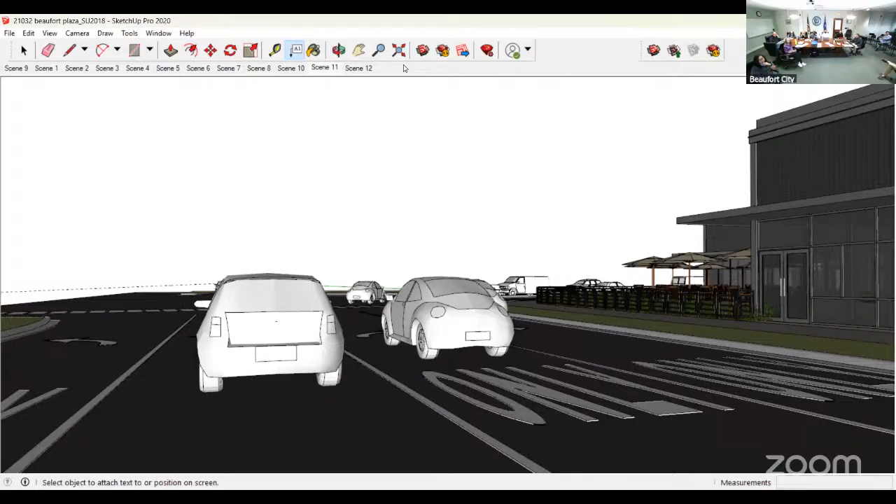This is coming from Lowe's up 170 northbound. But again, engaging the street while pulling people in with the use of the buildings. And then kind of the view that hardly anybody will see, because you don't stop in the middle of the intersection, but it's something nice to be able to pass by and see.

We presented or discussed a version before which had the buildings slightly tighter in the back, so it didn't have a long view when you were turning the corner. The suggestion in talks with city staff was that we try to open that up a little and get shorter faces of the building to the sidewalk, then create that larger face as it tapered back to create longer views as you go around the corner. These are just things to consider as an alternative, I wouldn't say an alternative to a two-story mass order or the two-story requirement.

So I like that concept a lot. With respect to that particular corner, I'm just wondering - I don't like that corner. They took a crooked corner and replaced it with another crooked corner, and there are a lot of accidents there. I'm just wondering, it does look like that pedestrian plaza comes really close to the road in this rendering. It's right up to the backside of, if I'm not mistaken, the existing sidewalk there, so it comes right to the backside of it. What it doesn't do, which a building would do, is block that view.

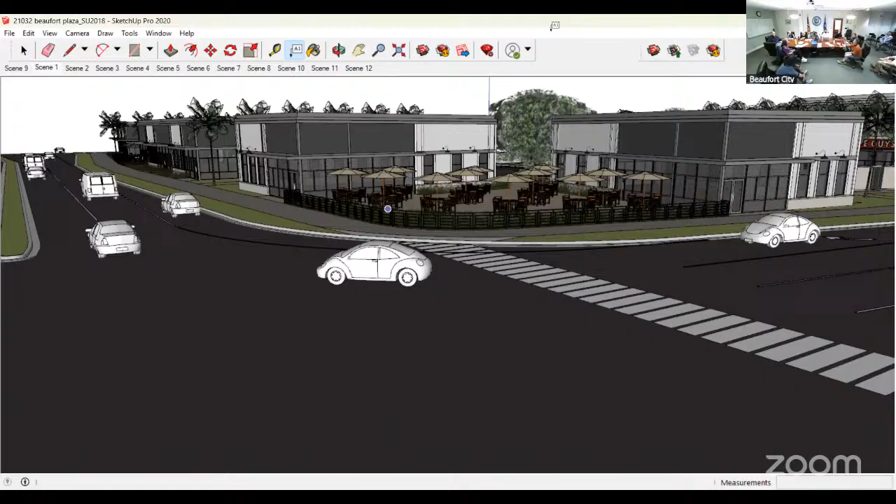Any other public comment before we leave? I'm going to go ahead and close the public comments section then, and let us go to our discussion of chapter 4.

My voice sounds like it's changing. I'm over being sick there for 5 weeks, but my voice seems to be struggling.

Kurt, is there any way you would like to approach the rest of chapter 4 in particular? Well, as of the last meeting, there was a suggestion to just do the notation guide of everything.

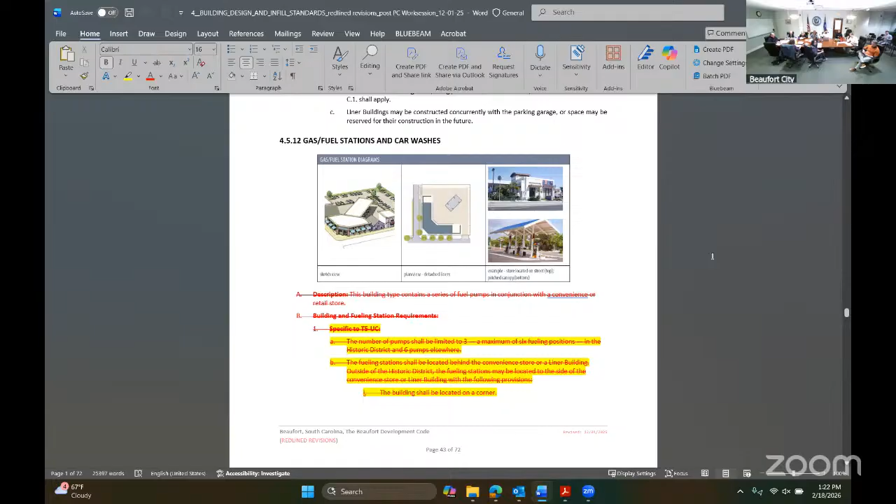Okay, everybody same page. Right now, we had some very general discussions. We started off, so I think one of the comments was the schematic on the left.

It's kind of like an urban Buc-ee's or something that I don't think anybody's ever seen. So that's probably not likely. Not yet. Yeah, maybe we'll call it Buc-ee's. They can do a little Buc-ee's and an urban Buc-ee's. Anyways,

So I think everybody recommended kind of, if you remember, that's kind of where we stopped last time. We can revise those schematics, but essentially we were, for all intents and purposes, rewriting this section. Let's just start. So we're taking out the existing section and revising it quite a bit, so if you keep going.

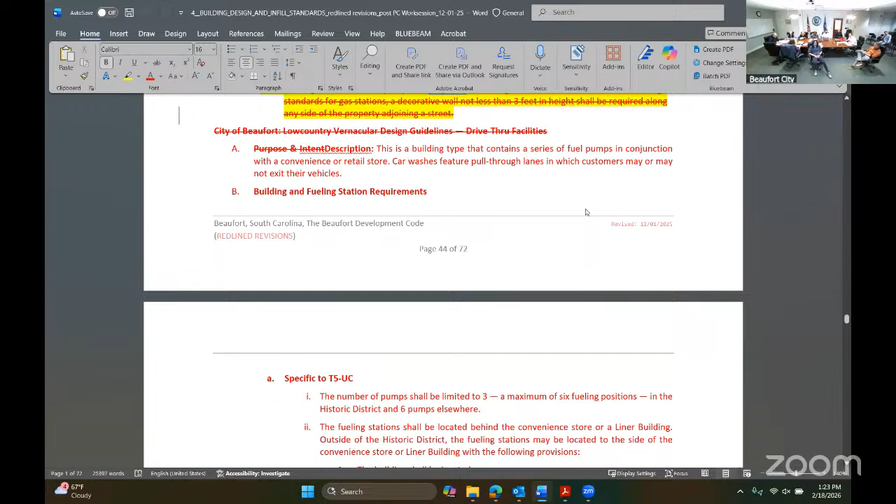It starts with specific T5UC requirements, which are just being cleaned up a little bit, but not too much, then adding the general architectural design after that. Then the low country design - one thing we see a lot with gas stations is the colors. They're somewhat difficult to deal with because our code requires fenestration on the gas station building, corner lots are difficult at times, and they like to use bright colors and blank walls. We want to make sure the Lowcountry design standard is also there, so as you go down to site planning and orientation, we were trying to address all these things.

Before you get to that, could I ask you a question? Going back to building fuel station requirements specific to T5UC - the number of pumps shall be limited to 3, with a maximum of 6 fuel positions in the historic district, and 6 pumps elsewhere. Is that distinguished from the current code? It's been revised, but this is similar to the current code. Are we looking at a proposal or the current code when we see the red? This is a proposal, but some of it is similar, just reorganized - the yellow is all new.

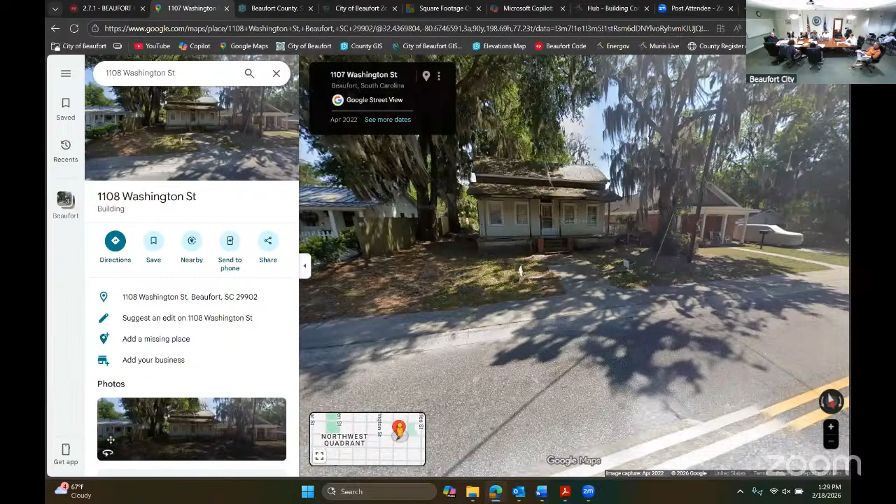So it looks like there's a gas station at the intersection of Harrison and Boundary. Is that in the historic district? Harrington... yeah, that's the liquor store too. So I think it's got a couple of gas pumps.

We would take out the historic district reference. Are you okay with going to 6? Because this was grandfathered in, right? The limit was 3 in the historic district, and then 6 pumps outside of it. That would be basically 2 rows, so that's 4 pumps essentially. Well, that's grandfathered, so. All right, so we'll eliminate the 3 and make the historic district.

Sorry, I've gone through this a few times, but we're kind of in a more detailed discussion, so it's hard to. I'm sorry, go ahead and go forward then with the rest of your.

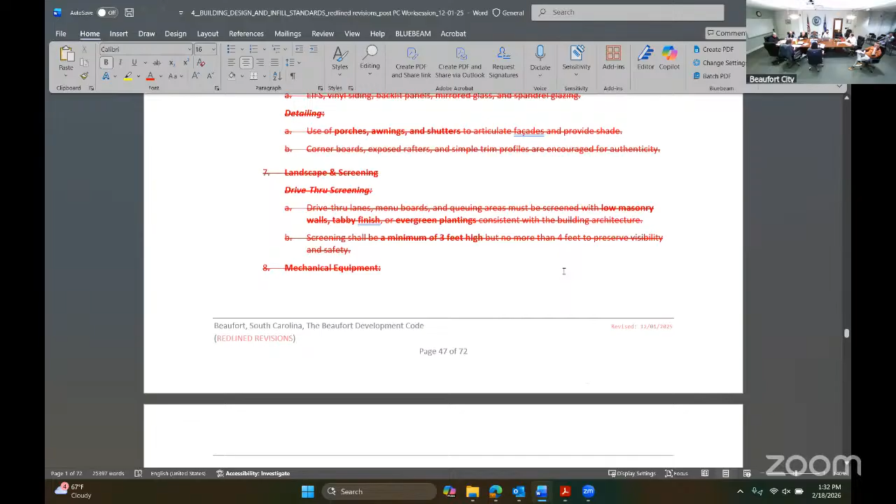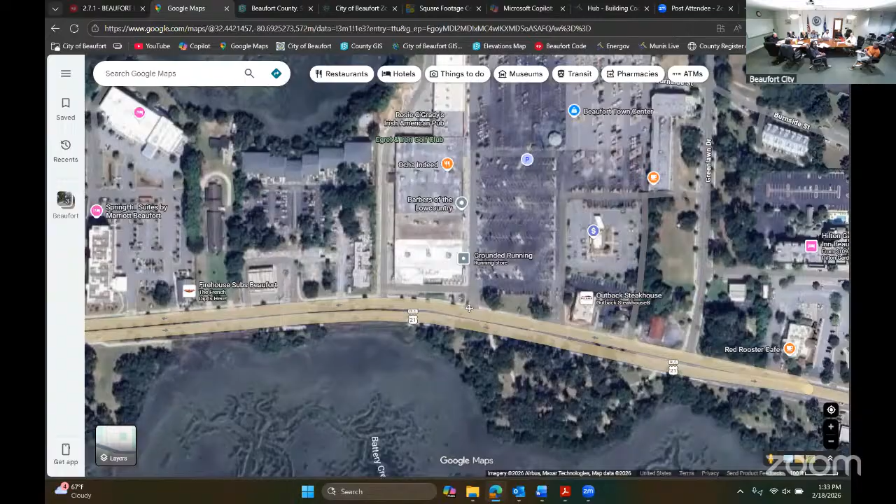that would comply, right? You mean the one out on 21? The one on Boundary Street? It's on a corner, and the corner is given - the building shall be located on the corner - that complies. Essentially what this means is that the pumps can't be forward of the building, that's the best way to put it. Which is usually what gas station companies want to do, because they want you to easily pull into their pumps from the street, and you want to see the pumps, see that they're open, see how easy it is to get in. So if that Enmark was not on a corner, that would not comply - they would have to put the pumps behind the building. That's right, and we mirrored that design with the Parkers as much as we could at the Beaufort Station.

Because that had already been approved, I think, by the MPC, but when it came back to you, they used the corner similar to these stations, so you can see the pumps. Those do look like 3, don't they, as opposed to 4? That's a lot, it's a pretty big pump area. Yeah, so they got 6. So this isn't in the historic district - this was built when this code was in place, or maybe the precursor to the Boundary Street development ordinance. This is pretty new, built in the last several years, like 3 or 4 years. So I would say this substantially shows what this code is trying to do - this is exactly what it's trying to do.

That makes sense to everybody.

You said this was built in the last 3 or 4 years, you mean the building itself? Well, the gas station used to be closer to City Hall. I forget if there was something there or not, but they did an extensive remodel in order to get this station as it is now.

I've been coming in here ever since 2016, and that gas station, I think it's always been there like that. I do think the car wash building is new, because I remember when it was built, that's been in the last 4 years or so, because you had to create a driveway to get into it.

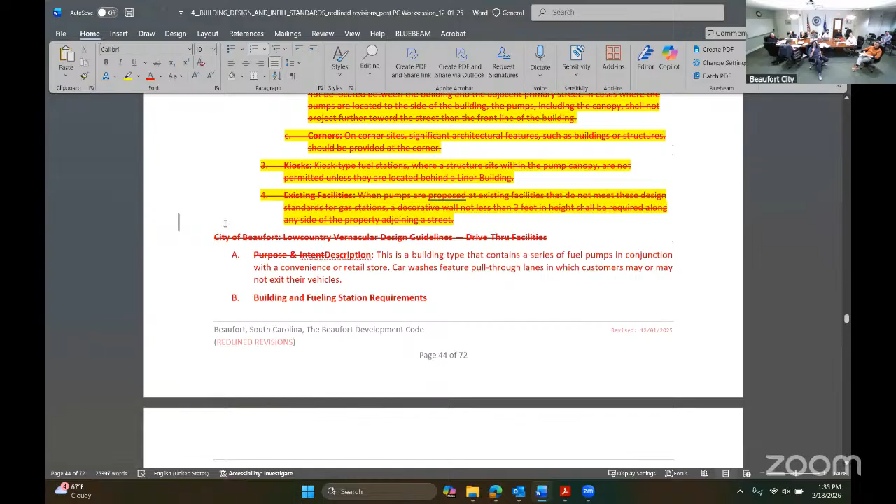Let's go back to that picture that you had, and the street view. So you can see, this probably could have been a little more successful for pedestrian orientation, but they've got the windows on both sides of the street, since it's on the corner.

So we're trying to do this for all of the gas stations basically, so they have fenestration. Do you think this meets the frontage requirement on Boundary side? Well, the gas stations are specific, that's why they have to be at the corner, and why they're kind of exempted out, because it would be impossible otherwise to make them work. That's why they're their own section with specific standards, so I think they did a pretty good job.

I don't know if Olivia, if you were here when I think this, it's definitely here, and I think it was done under the Boundary Street code, because I remember this issue about the fenestration and the windows, since it's on a corner, trying to get the windows in the corner, and Subway, and there might have been a hood. I think this was done under the previous form-based code, the precursor. So what we're adding is wanting a more pedestrian oriented entry onto Main Street, which they've kind of done, but I don't know if they've done that well.

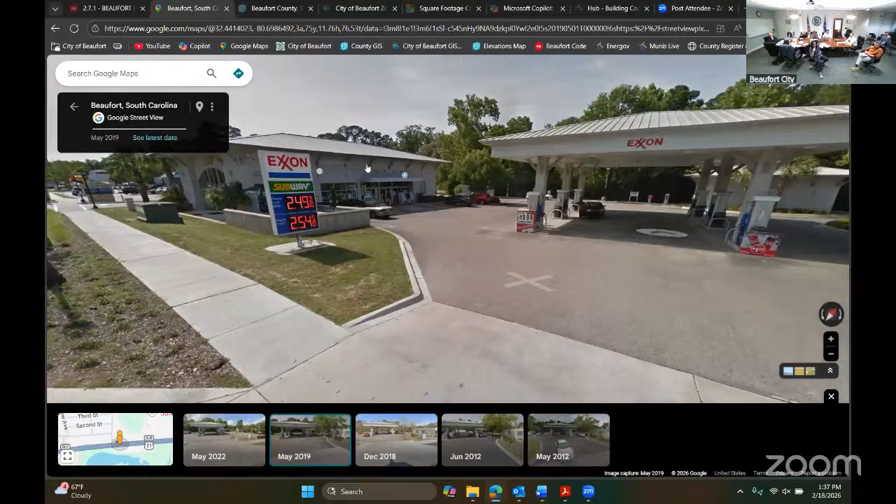Wasn't the original design for that front part to be sort of like a little restaurant? Yeah, I think it was. But I think that they kind of opened it during the pandemic, and then things might have changed because nobody was going anywhere.

So this is what the code's trying to do, is trying to create similar drive-throughs to this. Now, if you go down on page 45, so we talked about that in the yellow one. Okay, so we talked about that, just keep going with that.

And then great relationship, and then we've added B, which was pretty controversial when I first started here, and you just heard the presentation from Adam there: automobiles shall not pass between the building and the street. So this is again for drive-throughs, gas stations, etc. Trying to make that crystal clear that you can't put a drive-through lane or any kind of ordering lane, like the Chipotle or whatever it may be, between the building and the street. However, if there was a liner building, you could.

And then we've added outdoor seating, small plaza areas, kind of similar to the discussion that he had. I think it's a good example, we're trying to, and you saw from the picture that they have a little patio. I don't think I've ever seen anybody using it at the end market, but we want to encourage that.

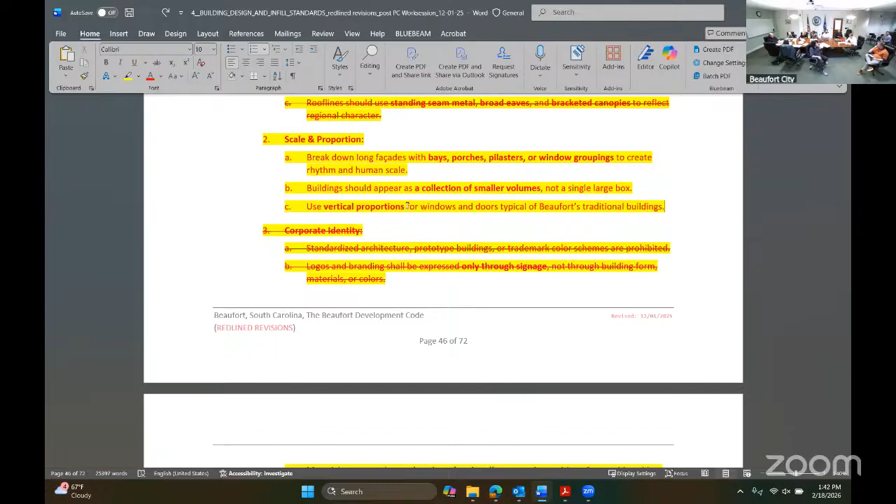There is a reference to chapter 3 about that, but this actually would be suitable, so maybe you should put car wash, slash oil changes. Yeah, because the bay is, the only thing really different is instead of being like a single bay, there's multiple bays and they're shorter, but the same concept of come in the front and out the back, or vice versa. Okay, I think that.

And they're proliferating almost as much as car washes. Yeah, the one over by this whole area that went up, what's it even called, like a 5-minute Take 5. We tried to have their bays basically not face the street, so they had to build a little liner building. Their building, it used to be, but everybody knows what we're talking about. So they built a liner building, which is just for rent. It's been for rent. They built it, but it kind of screened the bays. So I don't know if you have to have a liner building, or you just have to have the building sideways. Yeah, see it there. That was the best, I think.

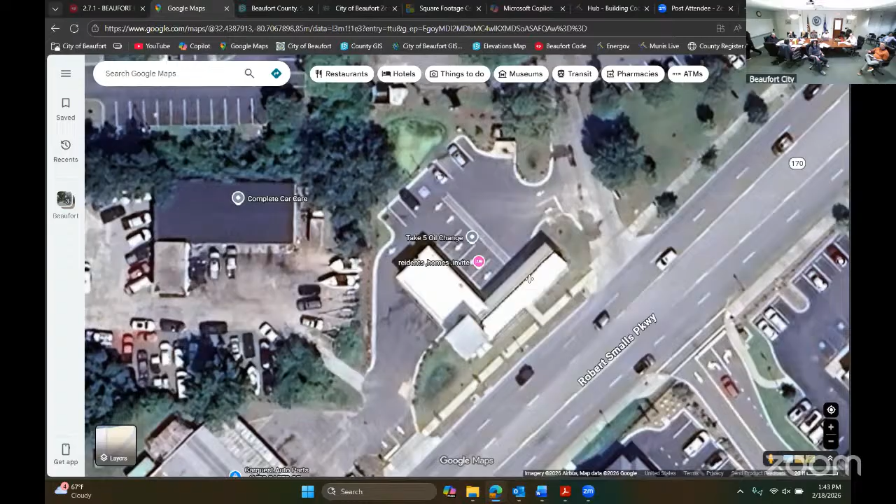It would be nice to require some kind of screening, because I'm thinking of that one by Lowe's, on the same side of the street as Lowe's. I mean, their building is sideways. And then you know, they got all those bays there, that are always open. The tire company, Discount Tire. This one, right, and I mean, it's a nice looking building, it is, but you need some kind of landscaping or something to screen that part where the cars are waiting around in the open bays and are visible.

I don't think you need a liner building. Right, let's see, well, there they got it there. Yeah, that's what I mean, you don't really see this stuff there. So but I think we can add that without too much of a change, so if you want to add, we can call it quick lube or vehicle service oriented facilities. Sure, we could do that. That's a good term. Makes sense.

And that didn't really have the fenestration that we'd be looking for, but I don't know when that was built. Looks there, that's good, still not bad. The worst side, it is kind of screened from the street. I already got the green wall.

Maybe that was the compromise for the windows too, for these. How do you get in and out, do you go in and back out? There's a turnaround, a circular drive there. You can pull in and loop around and come back out. So you don't go in one side and out the other side?

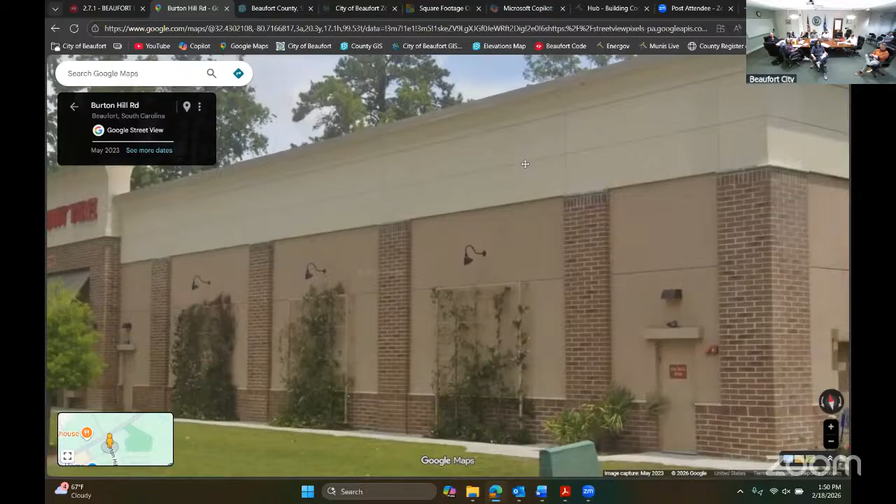Go back to fenestrationless walls? That one did have a little window, didn't it? Is that the one you're speaking of? Well, that one has probably 80 to 100 feet of blank wall, but they decorated it. Right, I think that was the compromise, and up at the corner they do have, I guess where the awning is, they do.

I don't know, I just wonder if we shouldn't quantify what we're asking for. I mean, because if we're saying 40% fenestration, they could do 60% blank wall.

I see what you're saying. Is that, I mean, if you go to scale and proportion, we're already- it says break down long facades, bays, porches, pilasters, or window groupings to create rhythm and scale. Right there, number A, I think this one's just to kind of reinforce that.

I think because this is going to go through design review with the board, it could be a discussion about 'blank.' We're looking at this, it's not exactly blank. It does have a window and it does have the greenery, and it seems like everybody thinks that worked out.

In that building in particular, or any vehicle service type of building, to use Mike's term, those are the backs of the bays. So you want windows looking into the backs of the bays?

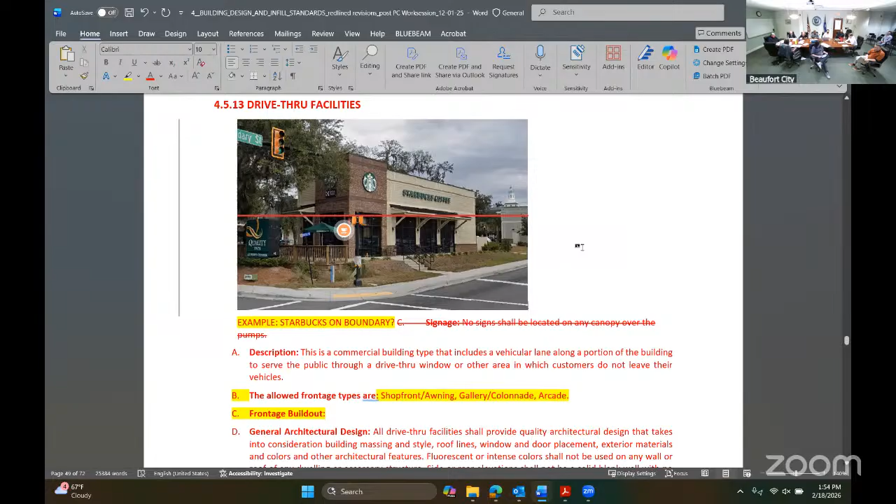The building itself works, but we will find another example for that. Maybe it doesn't need a picture - people know what a drive-through is, and this picture doesn't even show the drive-through anyway, and we don't want to show that. So we're saying either no picture or a different picture. We're gonna try to find it - that's already been brought up.

How about the one down the road, the giant drive-through? Do they have coffee? I've never ordered coffee there. Have you ever seen anybody? Once, sorry.

All right, so we'll remove the picture, but this is just drive-throughs only, right? Last one was gas stations, car washes. So, just on drive-throughs - question, is there a pending lawsuit right now about the Dunkin' Donuts on Lady's Island?

Is there litigation pending on that? If there is, it's with the county because that was a county property, not the city. Okay.

I don't know what the problem with that Dunkin' Donuts was. I think they wanted to do a drive-through and I don't know the reasons why the county said they couldn't do it, but they have formed back out into a very, very busy road. It's like Chick-fil-A, it's actually not bad, but getting better.

That Dunkin' has all that. It's really hit or miss as you go down Sea Island - some properties are in the city, some are in the county. It's hard to tell, no rhyme or reason. Sorry, yeah, that one's in the county.

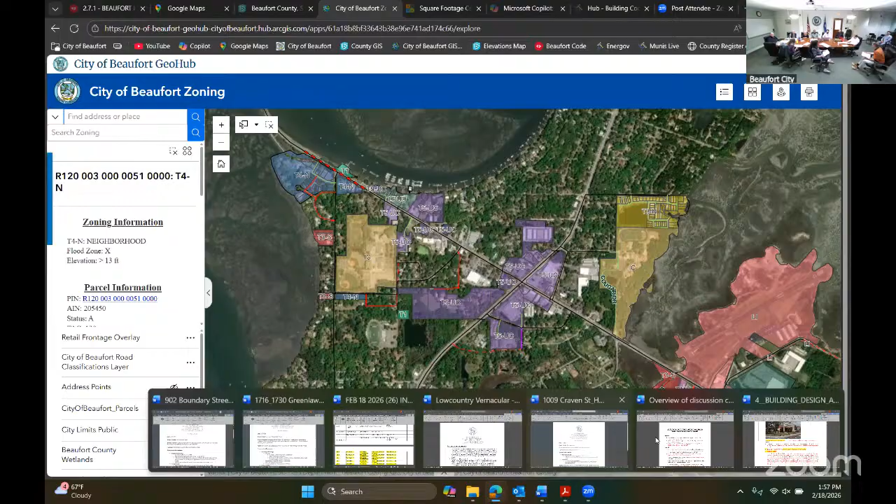So, speaking of drive-throughs, can we go to the satellite view, the boundary near Robert Smalls? I want to point out a couple things. Like that Dunkin' Donuts there is a bad example of drive-through, and that Chick-fil-A is kind of opposite of what I think we're trying to do with engaging these corners. So I made a note to propose prohibiting drive-throughs within 250 feet of major intersections, based on the street hierarchy diagrams.

I think that's a good idea. Do we require drive-throughs to be on a corner? No, I think that's what he's bringing up as a traffic engineer question. It makes it pretty hard to do a drive-through. They work better on a corner, I'll just jump in — think about circulation, otherwise, yeah. So she suggested we restrict drive-throughs to 250 feet from a major intersection.

I don't think that's all worth it. I think the problem — we have proposed it — the curb cut proposal here is not just about corners, that's the problem, it's major intersections, because traffic backs out. That's right, it has to do with access and the businesses. Starbucks and Chick-fil-A, you're going to have that backup. There are certain other businesses where it's simply not a problem. And I know ownership can always change, but it honestly has more to do with access on the major roadway — that's a stacking volume problem.

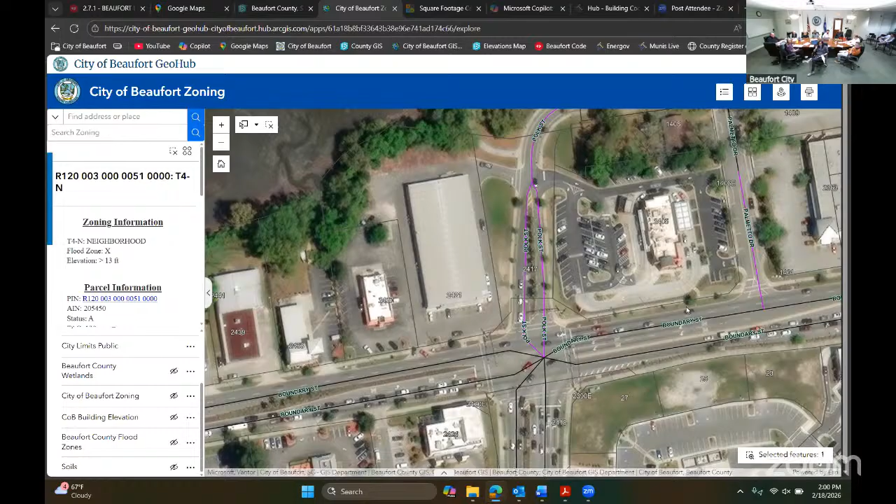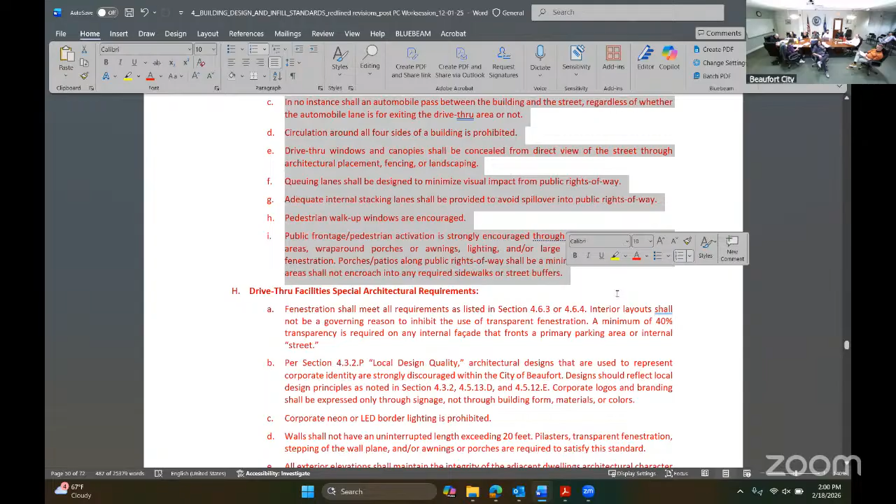Right, well I think that's... okay, let's go back to this because it's kind of in there, we can flesh this out a little more. This whole thing should have been yellow, honestly — all the red is negative, this is pretty much completely different. So obviously we're adding general architectural design and low country standards that we've added to every section. So again, for every use, you're trying to make it more of the Beaufort vernacular, the low country vernacular, but then you just go up a little bit.

Sorry, that's okay — let's just go through each one because there's a statement we can expand upon. So again, they have to front the primary street frontage, with pedestrian entry going toward the primary street frontage with direct access. That makes some sense, I think everybody's agreeing on that, right? So let's keep going down. Drive-through lanes shall be located to the side or rear of the building — everybody agree on that? It's like the last one, drive-through lanes in front of the building.

Chick-fil-A has lanes in front of the building. They were built before the form-based code, and then they added that other drive-through lane at a time when it was different. Paul said at our recent meeting there's quite a long story to it if you want to hear it. The original building was put there before the form-based code.

Under the code as it is right now, the Chick-fil-A model could not be used on that site plan. You could do a Chick-fil-A, but it would have to be organized differently. And to their credit, they have quite a bit of stacking now. Before, I'm not saying they should have done it, but you'll remember it really backed up on Boundary, it was bad news.

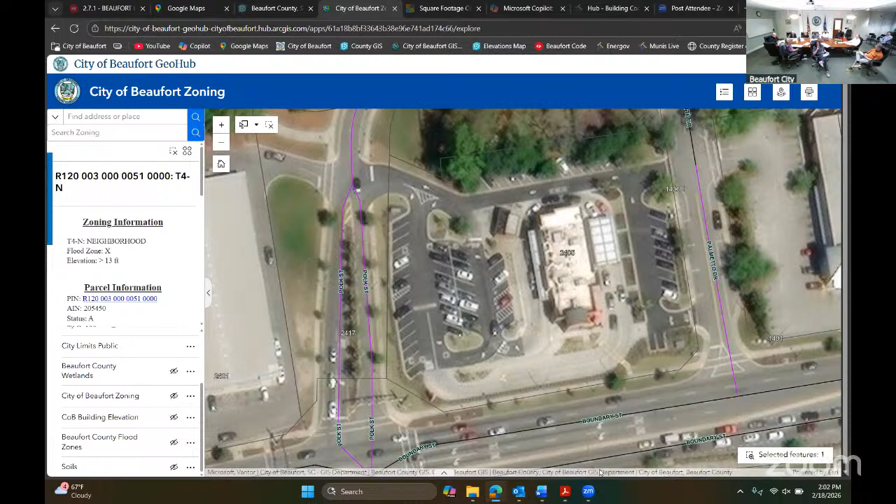We also worked with Dunkin' Donuts recently, we helped with their redesign, so it's about as good as it can be for an existing building. It's gotten a lot better, if you haven't noticed. It's pretty much taking the traffic off the streets.

Getting back to Benji's idea about limiting at intersections, could we limit the number of drive-through restaurants that could be at a given intersection? So you don't have four drive-throughs all at the same intersection? You could do that, but I don't know what the problem is if they all end up looking and functioning okay. I think the McDonald's, for example, looks fine.

Chick-fil-A now functions well too. Again, it's not appropriate for that site under our current design, but if they end up functioning okay, I don't know what the issue is. That's what we're trying to do here with the form-based code, trying to make them work.

After G on here, I think G reads okay, but then I added another letter in here, saying a traffic study shall be made to substantiate the proposed stacking design.

Sure, let's go through this if you don't mind. We got B, I think, for everybody, which is rear on the side, we're just making this very clear, because there was a lot of controversy before I got here. I think there were text amendments, lawsuits, appeals, and newspaper articles. C is just trying to make it really clear, and D is making it even clearer, so that you can't do like the border lane, which was a controversy.

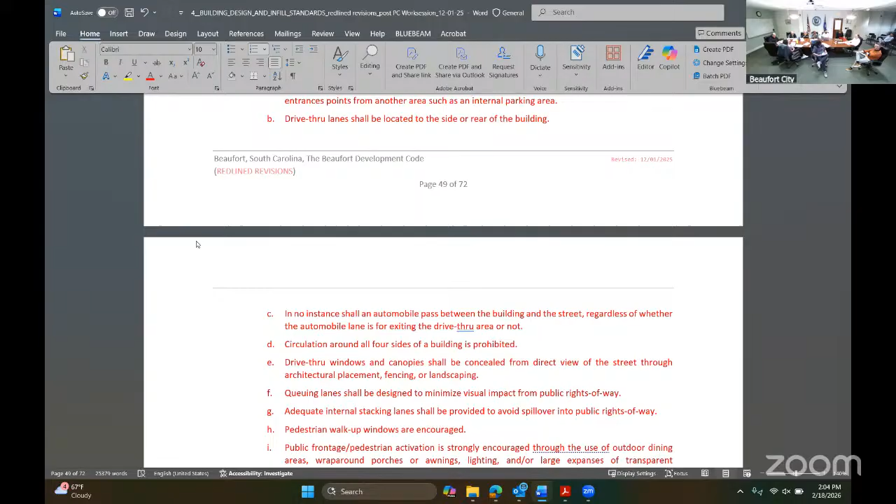The drive-through windows and canopies, per E, can't be seen from a direct view of the street, but they can use fencing, landscaping, et cetera, to screen that. That makes sense. Then queuing lanes shall be designed to minimize visual impact on the public right of way. So that's what we were just talking about.

G covers adequate internal stacking lanes. I think that's where we can add what Bill stated, that you have to provide a stacking analysis. I think G is fine as it is, but I would add another letter after G, saying a traffic study shall be made to substantiate the proposed stacking design.

Trying to limit the number of drive-throughs in a particular area, I think this will tend to limit whatever you need to do. I would just call it a stacking study, differentiated from a traffic study.

Oh, I'm sorry, I said traffic study, that's what I meant, it can maybe just be put into G as another clause there. You don't have to renumber, you can add it into that section however you want. Can you explain to me the difference between G and a stacking study? When I talked about it recently, what I was talking about is, for example, a queue analysis.

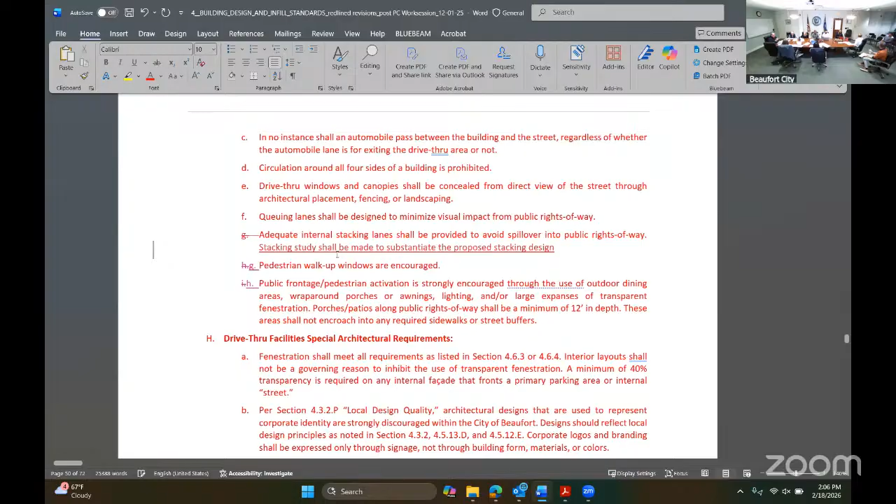Every one of these queue analysis stacking studies are different based on the different restaurants. So they have to come up with evidence from other examples at other locations that substantiate, based on the design of this restaurant with their name on it, that they can show at peak hour that they have adequate stacking. They have to demonstrate to us, and they know how to do it because there's a standard way of doing those.

So does adequate stacking mean that all their lines are contained within their site? Yes, exactly - so there's no spillover impacting general traffic. Right, okay. And they're gonna show those to us, and they have to satisfy us. We will have the right to look at it and say those numbers just don't look right based on my experience with X restaurant.

And just a reminder, the TIA, traffic impact analysis, is required for any use that generates over 50 peak hour trips. So I would say any drive-through, something like that.

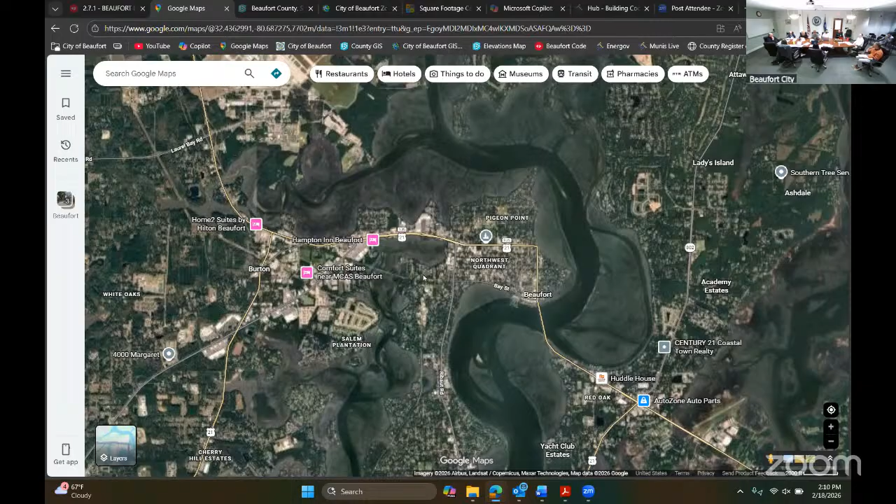You mean like Boba's Chicken over by the Food Lion? Is that what you're talking about? Yes, it has a little drive-through thing, they have a little order window on the side. I don't know if everybody uses it. Boba's Chicken, yeah, that's it.

Well, that's a good point, they're not gonna generate 50 peak hour trips. But that is supposedly a one-way street there, which nobody follows as far as I can tell. When you see people, is it one way going out away from the picture? Yeah, you can only go that way. I've never seen anybody follow that - no, I use it all the time.

Really? I went the wrong way. You go the wrong way every single time. I come in that way.

So is that something we want to encourage? I mean, low volume, but that's where I think you can have some discretion and wouldn't necessarily require a TIA.

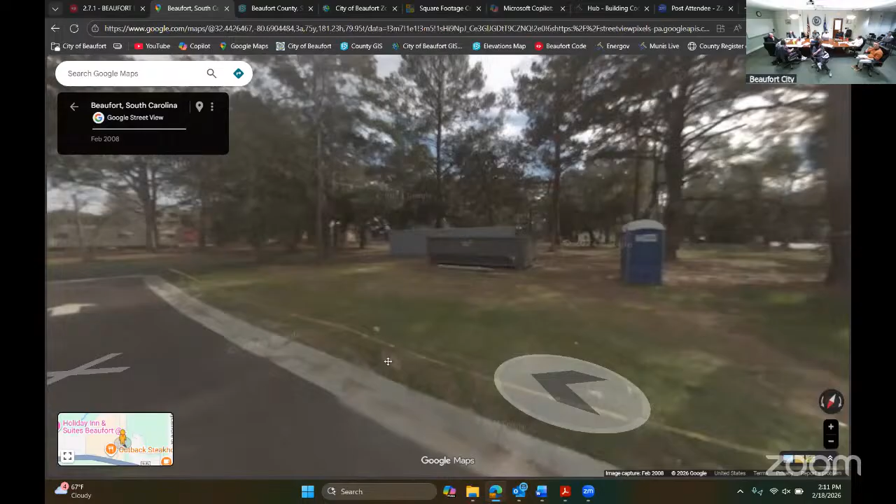It could be an exception made by the administrator. You could say a TIA shall be required except at the discretion of the planning commission under certain circumstances, as identified by the planning commission. I think require it unless accepted by the planning commission, and that way a low volume little place like that, we might want to consider doing that.

Because a TIA is gonna cost them thousands of dollars, and does it make sense for something like this versus them just proving what's their typical queue? This is off the main drag, it's a small place.

By the time it gets to the planning commission, and then the planning commission says do a TIA, that's all the money and all the time. It just seems like if one's gonna be required, it should be staff when they come to the pre-app, so they can require it unless there's an exception made.

No, just want to stay with the 50 trip. Right now we have a 50, and you all apparently think that's too low a bar? No, too high a bar.

It could be, unless, maybe you just have the administrator's discretion. You have the 50, then you can add, if you wanna lower it. He probably would have just waived it, so you don't want to give the administrator that. So you'd say you have that at 50 unless, because of special circumstances, the administrator decides that one should be required anyway.

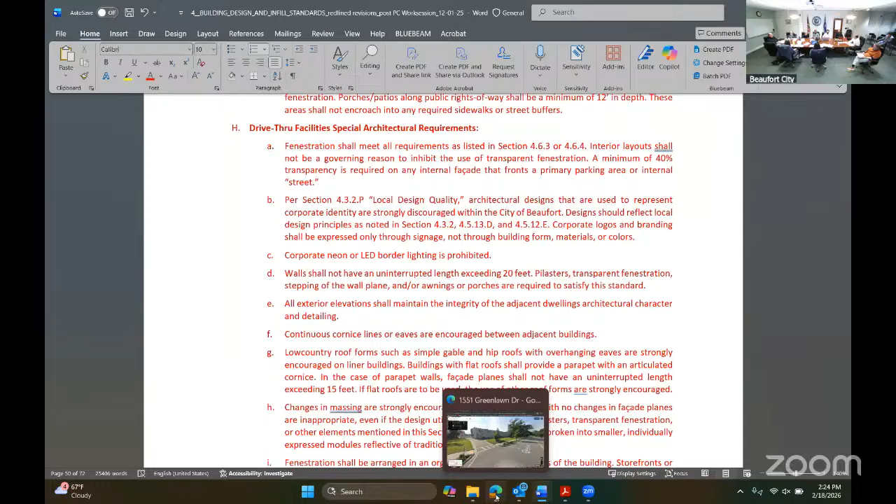I wonder if we could find some examples of where a corporation has adapted to a local style, because one company that comes to mind is Parker's. They do a really good job. They put up a lot of buildings, you still know it's a Parker's, there's a Parker's sign, but their building architecture adapts.

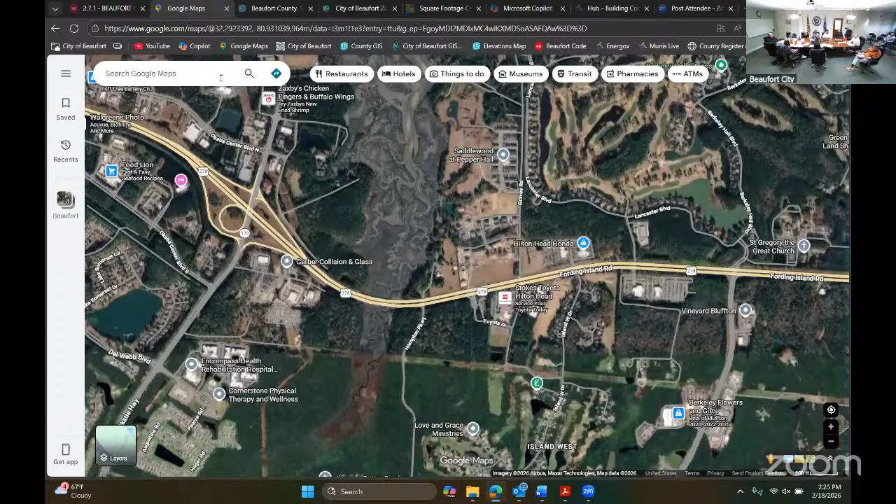If you're heading westbound on 278, just before you get to the ramp to head to 170, coming back towards Beaufort, there's a Parker's they just built that looks very, very Low Country. The one at the new shopping center, yeah. I think it helped that their headquarters understood that at some point.

And again, almost everything's gonna come through the design review board, so that's where the discussion can get really detailed, so to me saying 'strongly discourage' is pretty strong language right there, and if it's still not working, then at the design review board they can say, I'm sorry, but this really isn't consistent. I'd rather see it reworded so they know they're having to deal with the Low Country.

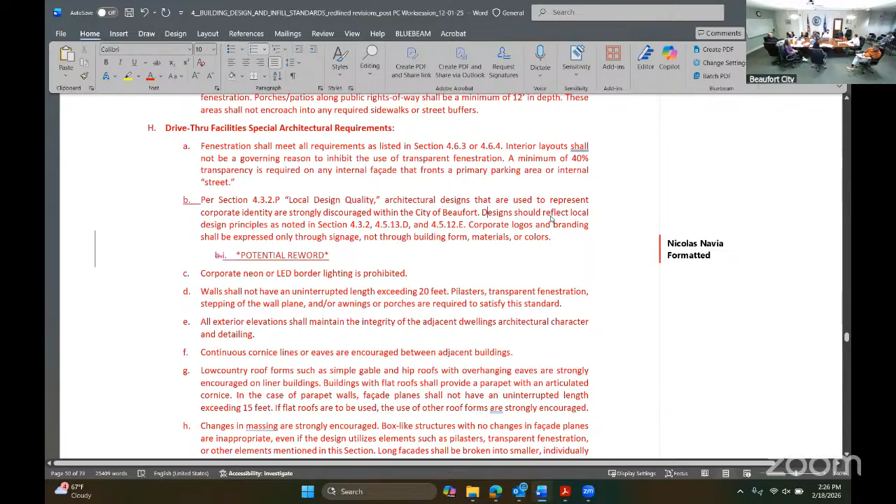How about if we reworded it as follows? Keep the first sentence the same, and then say: used to represent corporate identity must be adapted to Low Country vernacular. I'm in section B. First sentence stays the same, and then the second line would be: corporate identity must be adapted to Low Country vernacular. Yeah, that's the idea. Now, do we have that same basic language elsewhere?

Cross-reference - we have that same basic language under gas stations, car washes, drive-throughs, tire stores, all that stuff. We don't want... we have the local design in every section, but we can add the Low Country language to every section. You do it in the commercial section so it doesn't just apply to restaurants, but to all of them. Once we start getting people to do that, it'll become customary for new people coming in to know they have to comply with it.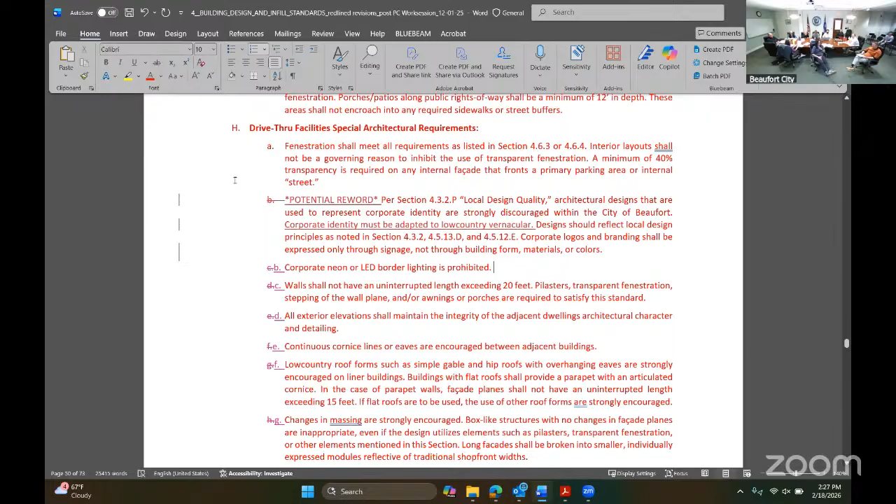One thing - if you're going to use the same wording about architectural design and the Lowcountry descriptions for all the different building types, you could just say it once and then for the specific building types, reference that section. Otherwise it's going to grow huge, saying the same thing over and over. That's something we'll have to work on. There's more of this that Jeremy put together, and I should have had it here today.

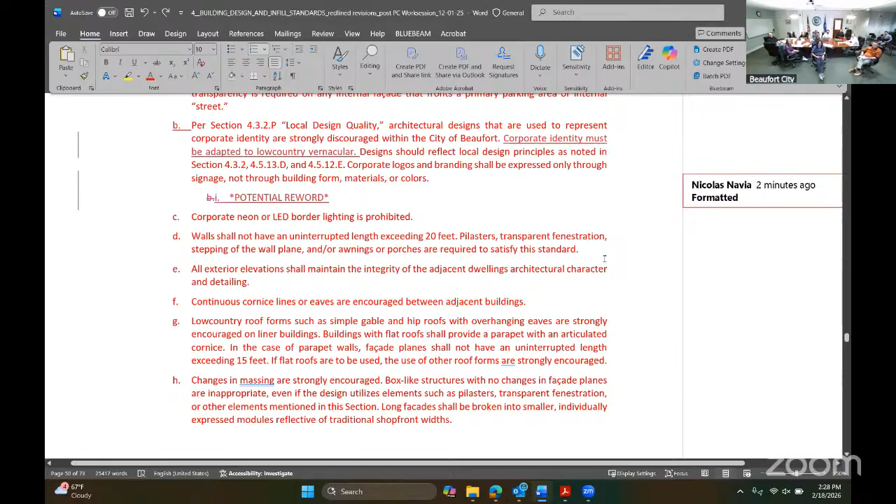Everybody likes that, keep going down. Okay, so then we get into the Lowcountry roof forms - simple gable and overhanging eaves are strongly encouraged.

So wait, what about the neon lighting? For example, as I was driving over here I saw a neon sign saying 'open' - are we prohibiting all neon lighting, or just neon lighting on the exterior of the building? That's not corporate though, I agree, but if we allow some neon lighting, why would we not allow more? You don't have to get a permit for that little sign. This is about border lighting, like if you're going to light up the building - an 'open' sign isn't technically lighting. Lighting to me is something that lights a parking lot, that's different from a sign. Is neon lighting such that it would light a parking lot? I thought neon lighting was always decorative. I think this is talking about it running along the roof, around the windows - like that tattoo shop on Ribaut has a lot of it. I think this is clear about what's what.

Okay, so the roof forms - that's repeated in a lot of sections already. Are you okay with that, since it's encouraged? I think it's fine. Okay.

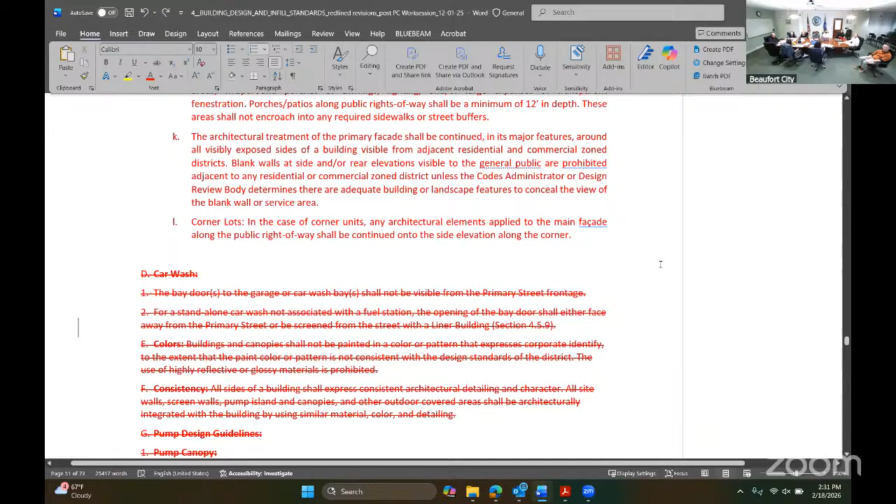Civic building. Not too much changing, you can just go down there.

I have just one issue. Okay, go ahead. When we talk about civic buildings, and public buildings, schools.

I actually am an anti-terrorism force protection expert. And I've been a consultant for the New York Yankees, the Mets, NFL stadiums, a lot of federal buildings, courts. And I do anti-terrorism force protection, okay?

I think one of the things we should be aware of is when we're designing, or having designed, any civic or public buildings, we need to have that in mind. I know I brought it up when we were discussing schools. They did not plan, in my opinion, at the design stage for the advent of having to install stuff like that. And you need to do that in the design stages.

So, to add something with the recommendation—I don't know if it's something we want to add, but we could add something to these public buildings that pertains to equipment. No, it doesn't have to do necessarily with equipment, but the ability to add that equipment later on.

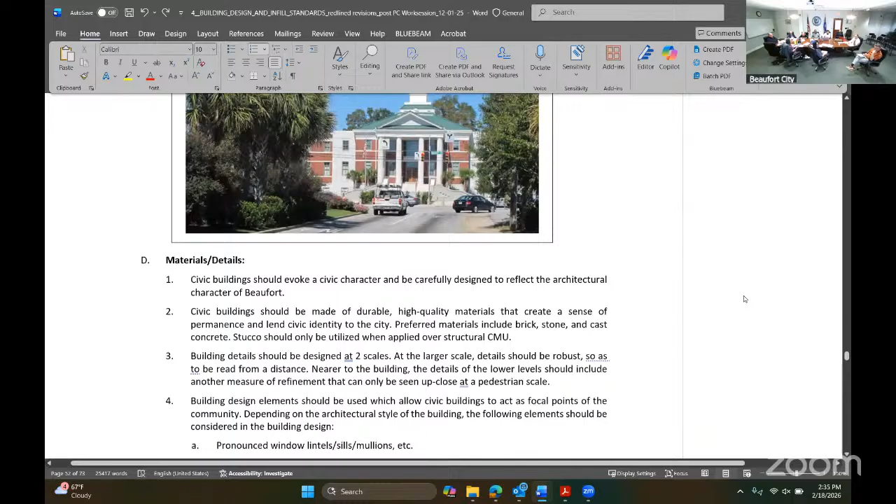Well, let me jump in on this. Under A there's something called special requirements—I don't know where I am here, I'm on page 55—but special requirements, could that be it? That's church and institutional, and there's civic, we could do both. We were creating—now church and institutional is a whole new category.

Okay, so add something like 'submit plan for'—yeah, whatever the right term is. Okay, so we reported to cover churches in 4.5.14A, in the third line down.

It says churches, and I was wondering about that because I wouldn't necessarily consider a church a civic building. Yeah, that's why we've created the standards. So do we want to take it out of there? Is it still in the civic building section? That's my fault, it is. Yeah, line three—we were trying to replace this with some better standards.

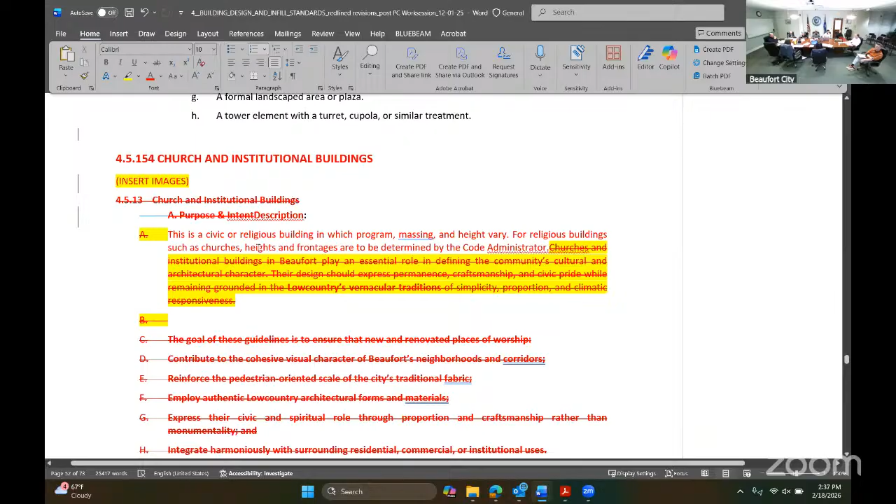I think we can do something as simple with civic buildings and institutions to just say consideration regarding security, anti-terrorism, and force protection shall be provided in your design proposal. I do need to change the description, or we can maybe just use the new standard.

But like sign off from the police department, that they look at plans, or the fire department looks at plans - that's gonna be required anyway, I would think, wouldn't it? We have the fire department look at stuff, but not really the police department.

So I don't really want to be approving anything saying 'this building is safe.' That's not really something we should be certifying. We're just asking questions, we're not gonna give it the seal of approval. That's why I said 'consideration' - you can say consideration for safety, protection, et cetera.

I think, because who knows who's gonna be on planning commission or design commission later on. I intend to do a presentation to the police department and fire department.

About this, just since I have the expertise, I might as well share it. You know, the sheriff's department - I've sat through this several times - they do active shooter presentations all the time. That's not what I'm talking about. Well, wouldn't that go together? No, it's a whole different thing.

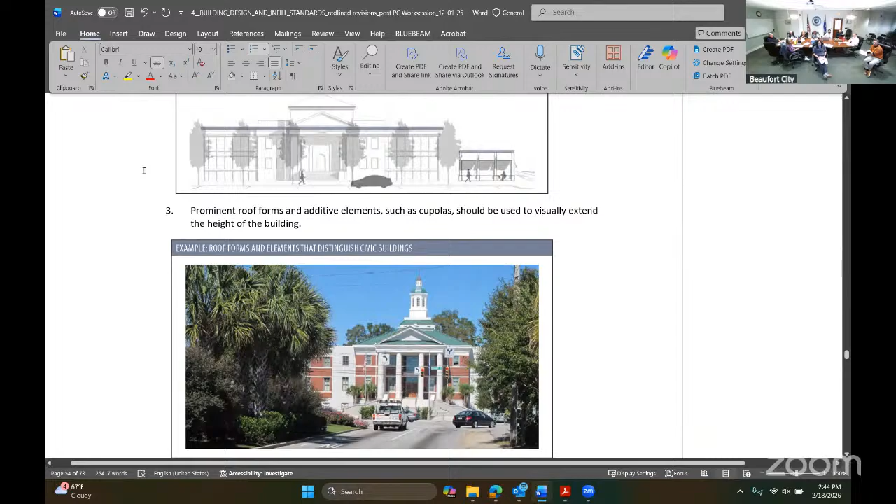What's that? Let's go to the new section there. It's out on Burton Hill Road, back up at Public Works. And then, really, it was suggested to be tilt-up architecture.

That was where the city hall was gonna be? Hilltop, up out in Burton. It was a suggestion. Or tilt wall—just take concrete slab walls and tilt them up. Oh yeah, that looks good. That's what we're doing—you park a bunch of concrete slabs and tilt them up in place one by one.

That's what we're doing for the healthcare facility, right? Well, they're gonna change it, right? Well, that's what we said. We've had some meetings with them. Let's see if they— let's see, we can't talk about that. We haven't gotten anything new.

So you wanna talk about churches? All right, so this new section, let's just go down. We'll have to correct all of the staying in the civic building section. So where does it start? On 55.

Do you think institutional is—would that include like a jail? I mean, I think we gotta define that. I was thinking more like a campus or something like that. It could go different ways. You know, churches are sort of unique because protections are given by federal law, and we just deal with them individually and put all the rest of the government buildings together.

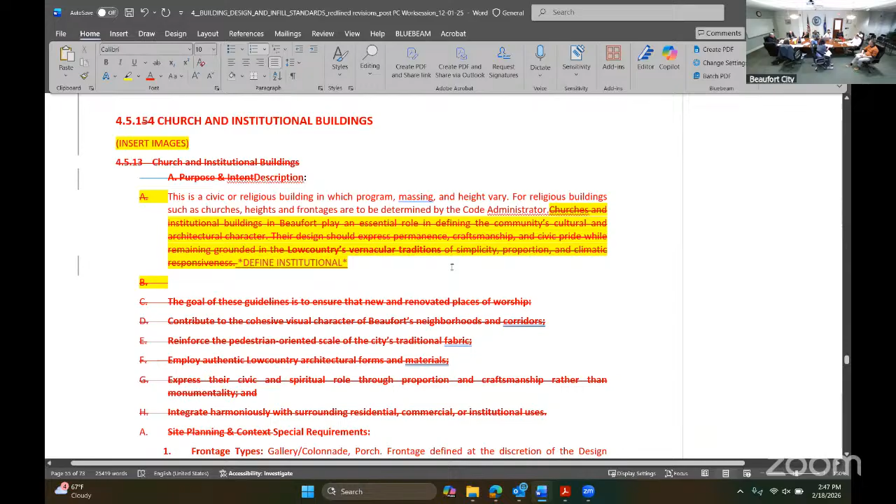We'll have to rework this then, but you like what we've done here—we've got architectural character, civic expression. Very different.

So online, examples of institutional buildings include schools, hospitals, libraries, museums, prisons, and government offices. Yeah, hospitals—they're all the same. Yes, you pointed that out—prisons and schools, very simple.

I've never forgotten you said that. The only change that I identified beyond 56—not really a change—is just reinforcing the draw from Lowcountry, and then I inserted vernacular as outlined in previous chapters.

Is there anything about this that you don't like? We can maybe combine it, outside the building. Some things I didn't like—just separate out the church.

The only thing I'd say is that everything in here is fine, but it kind of repeats similar things we have in other chapters, just written differently. That's kind of where I would go—more spiritual. Okay, being open.

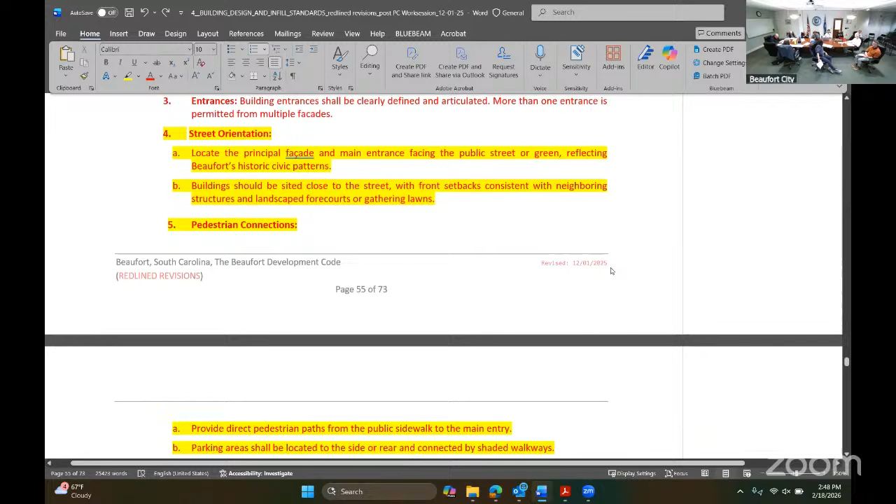Well, I'll rework this, Jeremy. Move some of this over to the civic building. Keep the church parts.

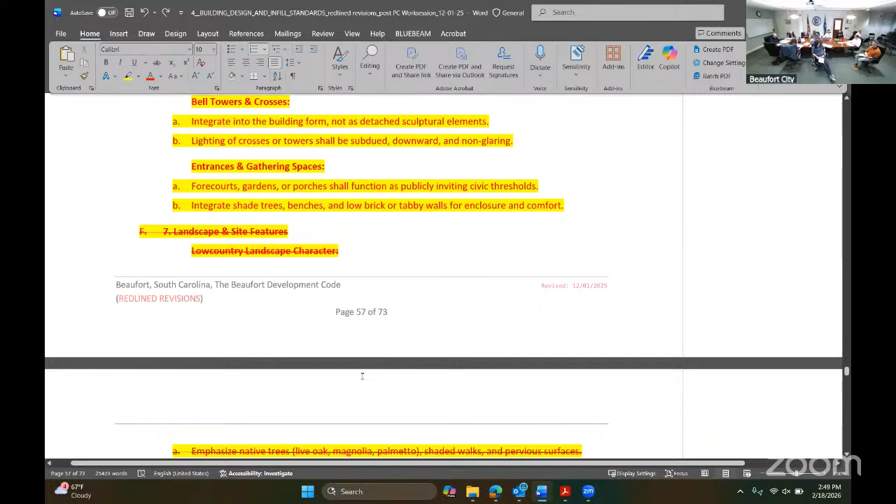All right, I think we're moving on to building design standards. It's important to get the strength of this section right, to make it reflect the intent of the entire code.

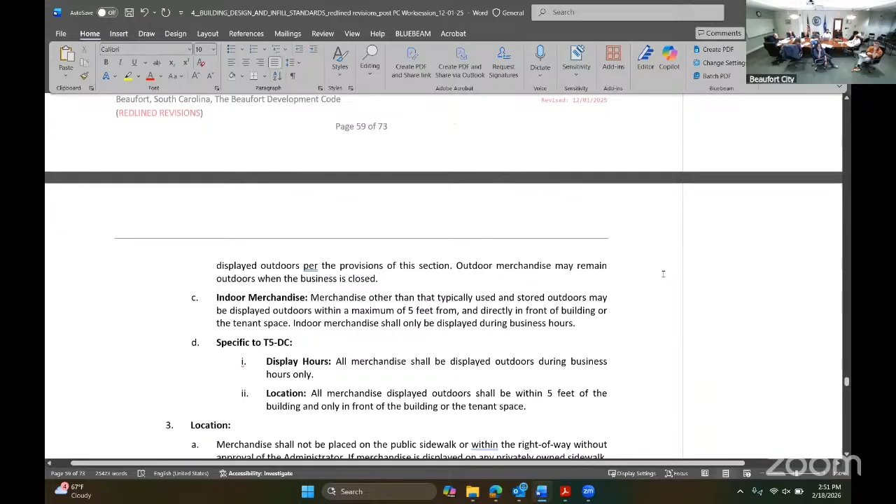For E, for E, the addition. And about accessory structures, can only exceed... I'm thinking about carriage houses, we've got a lot of 1-story. Does this apply to single family? No, maybe not. Oh, this is general, this is everything.

This is everything, this is just in general, so it's like where a garage contains an accessory dwelling above, it may exceed the height of the primary structure only if the primary structure is 1 story tall and the accessory structure is not visible from the public right of way.

That's what we've been trying to do, we just want to clarify it, this comes up all the time for us. But in most of these neighborhoods, Hermitage, Pigeon Point, Mossy Oaks, there are many 1-story buildings, and now people are interested in building carriage houses, the garage with the dwelling unit above.

That's required to be in the back of the house, all good, but it still may be visible from the street. And I just would hate for the housing person to cut that off, saying no, you can't build the carriage house style, you have to do something else.

Yeah, my carriage house, which I think was pretty nice, go by and look, it's not visible from Bay Street, but it is from what I call Sims, an alley, because it looks like an alley and functions like an alley, but it's actually a public street.

And it's 2 stories and our main house is 1 story. You can't really tell, but you can on Sims Street, because that's what you see. Our carriage house blocks our main house on Sims.

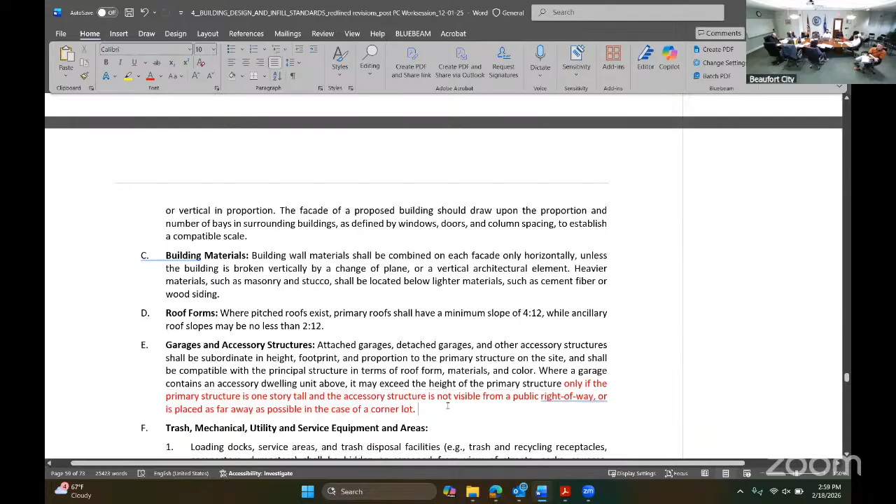All right, colors, anybody, colors? That's cool. Are we okay with that kind of thing? Do we want a more colorful society? I'm not sure. No.

We're kind of pushing the more, because that's more natural here. What's up?

I have some concerns, because in colors it says it shall not be painted in a color pattern that expresses corporate identity to the extent that the paint color pattern is not consistent with the design standards of the district. Are these design standards outlined anywhere specifically, or is it just what's in this paragraph that says as long as it's not safety yellow and whatnot, corporate colors would be allowable?

Well, there was this discussion before where we thought we could maybe come up with a color palette that we could recommend within this sort of thing. Currently, we don't have that.

There are specific colors that are more befitting to the Lowcountry and Beaufort traditionally, and it's just a case by case decision. If it comes to it, the HRB will basically approve of that. But it reads like we do have specific color or design standards of such in the district, which we don't, not yet. So I'm not sure if we want that or if we take it out, so it's a good point.

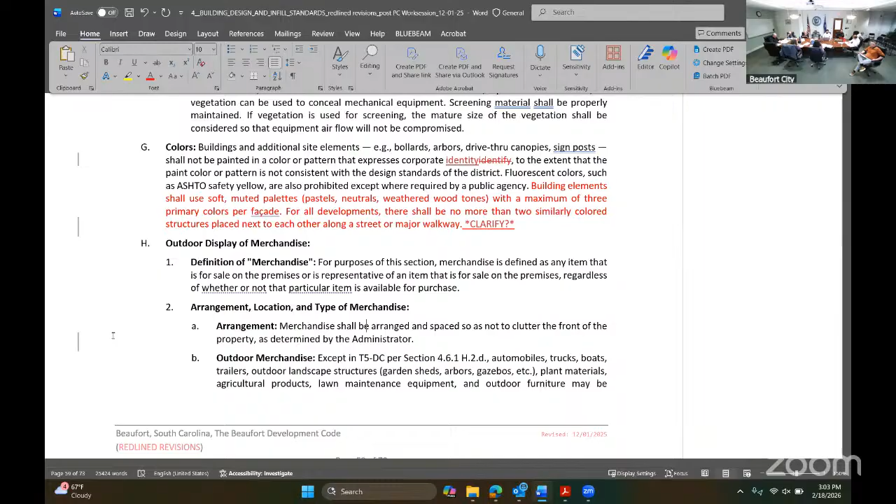Arrangement type of merchandise: merchandise shall be arranged and spaced so as to not clutter the front of the property as determined by the administrator. I had an add-on to that: merchandise shall only be located on the property and not on easements.

Well, an easement can be across the property, but you mean the public right of way. An easement would always be on the property, but these people cross the right of way line, which car dealers always do. That's where I'm going, the public right of way. And they shouldn't be doing that anyway, but they do, so maybe that helps put an exclamation point behind it. That works really good.

But so just car dealers, or is a car merchandise? Sure is. Other places like Home Depot or Lowe's, Ace Hardware, whatever, can do that too. The worst example was a big Ford dealership out there on the way to the airport. I've never seen a dealer with so many cars, and half of them were in the public right of way. We need to have some teeth in there so an enforcement agent can go out there and say, hey, get that off there.

That's in the county though. I know, I'm just saying that's an example everybody sees every time they go to the airport. O.C. Welch, the big Ford dealership on Independence Boulevard, that's 278. But his problem is he's got too many vehicles on the site. They always use that excuse, and guess what, buy some more property. Well, I think he actually owns additional property, he's trying to get a permit, but he's surrounded by wetlands behind his dealership, so he's kind of landlocked.

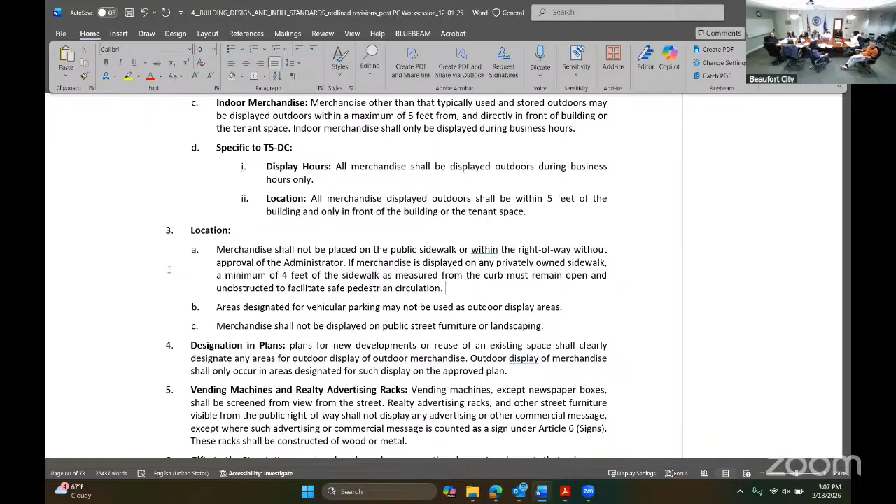I feel like the downtown management group handles this, I don't know if we can deal with it. I think it's on the advisory committee, and if they need to make recommendations, sure, we should consider it, but right now I think we just... So do we want to take out all that language about location? I mean, if it's been a problem... I don't know, let's maybe just leave it in there.

Well, what is the designation for the downtown district? T5-DC downtown. So except for the downtown district, this stuff applies. That way, if there's ever an issue we wanted to address, we have the language in the code to do so. So just leave the language in but create an exception. No, that exception already is there. Okay, so the C doesn't read right.

Just put a period after public street, I guess. Well, I think that means you can't put it in like the planting islands, planting strips, landscape beds. It's grammatically... still doesn't read correctly. Or displayed on or in landscape, in planting beds, or within public landscaping or something, or words to that effect.

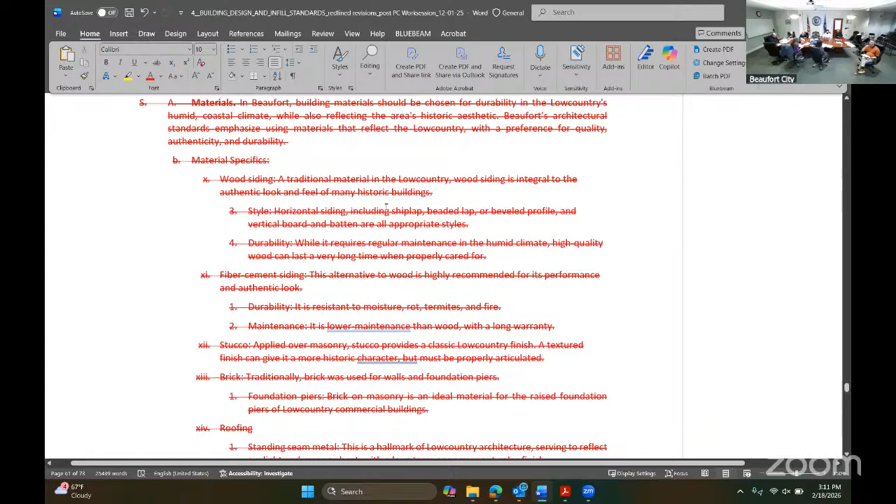We can discuss my next comment when we go to page 61, Materials 1, down to B. It says fiber cement board siding with smooth finish. I don't think that's right anymore, they now have a lot of different finishes for fiber cement that are being used. So I'd just delete the smooth finish on that.

So I don't know, why don't you like a wood grain? It's okay, well we'll go with that. Yeah, I guess I could tell, but everybody's okay with it. It's just different textures that they have now.

I think you're gonna continue, I just wouldn't limit ourselves. What's the thinking about the smooth? Why is that standard? The historic district standard is like that. It's more about honesty of material, it's not wood.

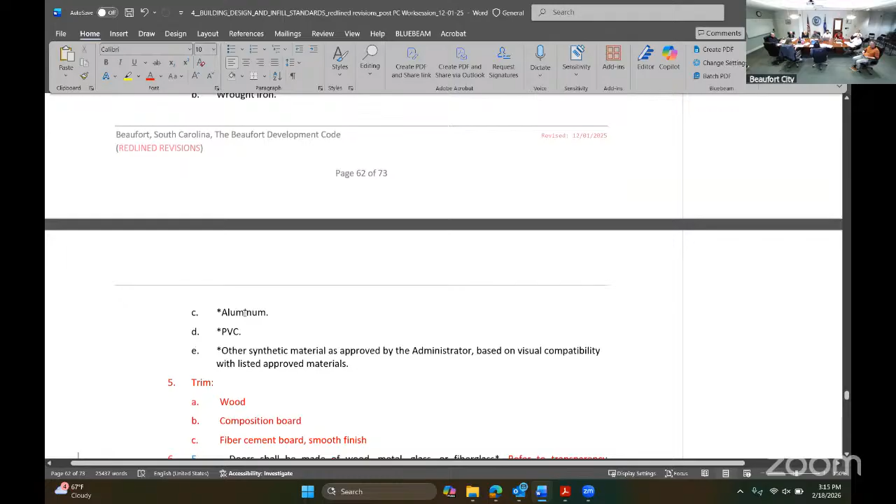Well then I'm almost sure that's the color of the Hardie plank, it's like a yellow color. It always is yellow when it comes, before you paint it.

Moving on, are we taking out smooth finish? Yeah, I can live with that.

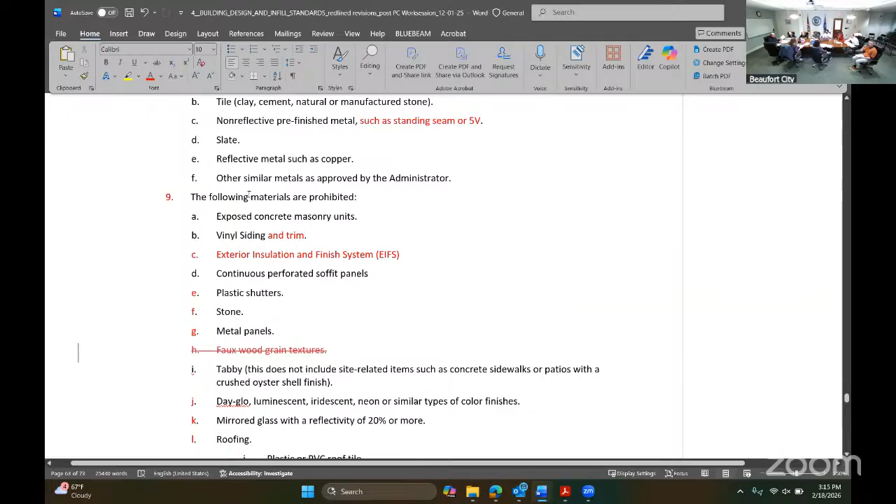Now, how about the vinyl windows? Let's go back. We're gonna get rid of the faux wood grains, I think. Are we okay with getting rid of that? No one likes it, do they? What about prohibited materials, where's that? Number 9, page 63.

Oh wait a minute, let's go to page 62 first, there's another smooth finish, they went too quickly. Well, I had him take that out. Under E at the top of the page, it just says brick. I think we ought to have brick, stone, or cast stone in there.

I thought we hated stone in Beaufort. Yeah, that's not a traditional material. Stone... river rock... well then you get specific. It's like historically stone is used in a lot of places, especially foundations. But not in Beaufort, because there's no stone around here.

I mean, there's other materials as approved by the administrator, so they can do that. There you go, if they can.

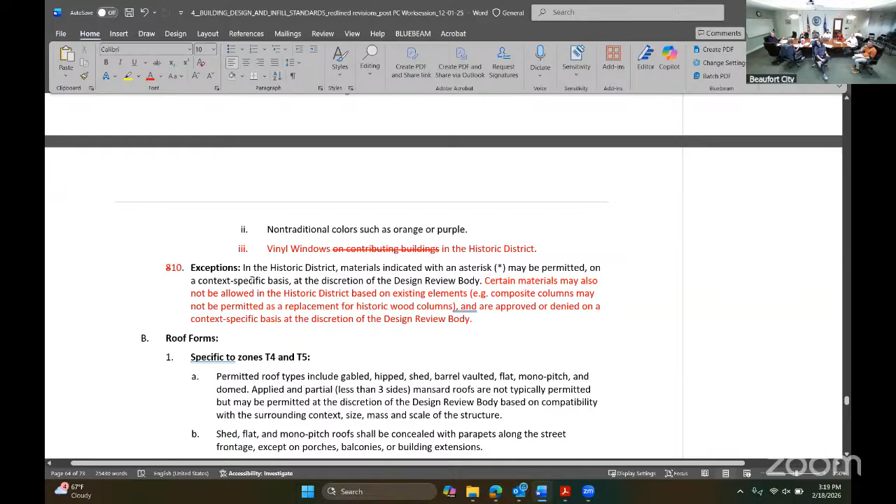It's already in the code, so we can just remove it. I don't see why we have PVC pipe illustrated. Let's look, maybe somebody knows something I don't. If it's an attractive color, say black, not like the white bathroom pipes, it could look good. But if you paint that stuff, the paint peels off, and with the heat and sun we have here, UV breaks it down and it looks horrible after a short time. Okay, let's get rid of it, it's gone.

All right, what about the other asterisked ones? Okay, the vinyl windows is probably the biggest issue. This is something Jeremy was really pushing, so I don't know how you feel about that. Where are you at?

You're talking about getting rid of it on page 63, right? Let's get rid of it, all of them. What are you getting rid of? Just the vinyl first, wait. Well, it says vinyl windows may be allowed on a case by case basis. Let's just get... so what's wrong with vinyl windows?

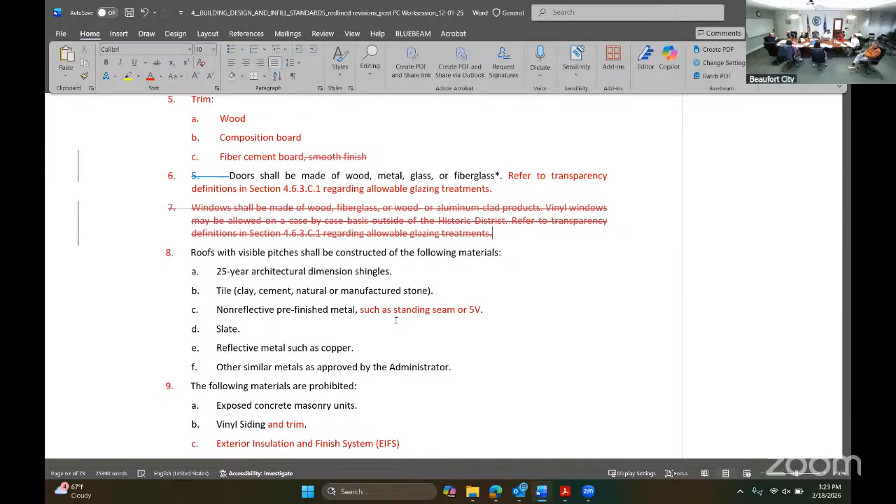Really? How many windows do you have? 44. Oh, wow. So if we prohibit faux wood grain textures, would that take care of Benji's hate? Yes, that would actually. But right now it's not prohibited, so this would be a change.

So I'm not in favor of that. Next meeting, because I think that then we get to the question about the Hardie siding, which we already agreed that we were going to make sure the siding has to be smooth. So I am against that.

So would I be right that these standards are going to apply in all the districts? Because that's going to increase the review time for the plan reviewer. Now they're not just looking at the site plan, you've got to have all the building elevations, a list of materials, the colors—even for every permit?

Everything, for all the Salem Bay houses, every elevation of every house. Well, we've only been doing it since we have staff. I was saying it wasn't required. And what did—I don't even know what 9C is. EIFS? Yeah, that's horrible. Maybe we can just pull it up.

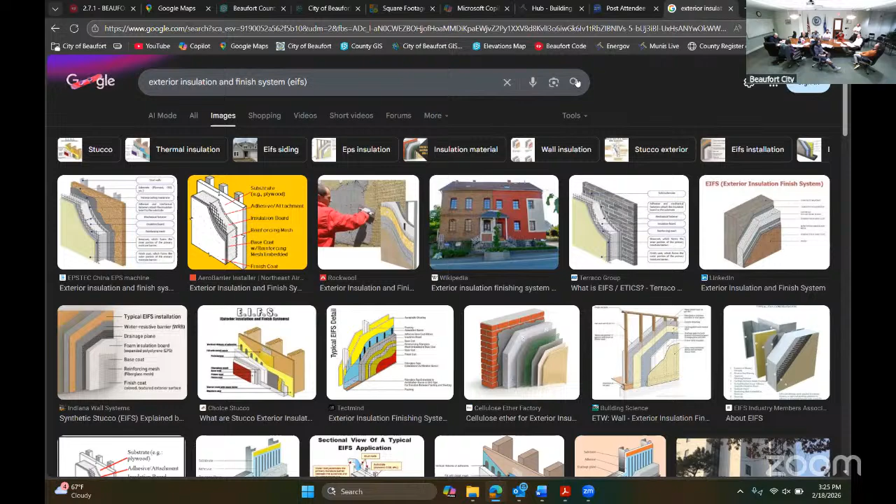Who are you? Nobody really, but my name is Merritt Patterson. I live down on the Old Point, long time contractor. Say your name again? Merritt Patterson, M-E-R-R-I-T-T, Patterson, P-A-T-T-E-R-S-O-N. You live here in Beaufort? Yes, for a little while.

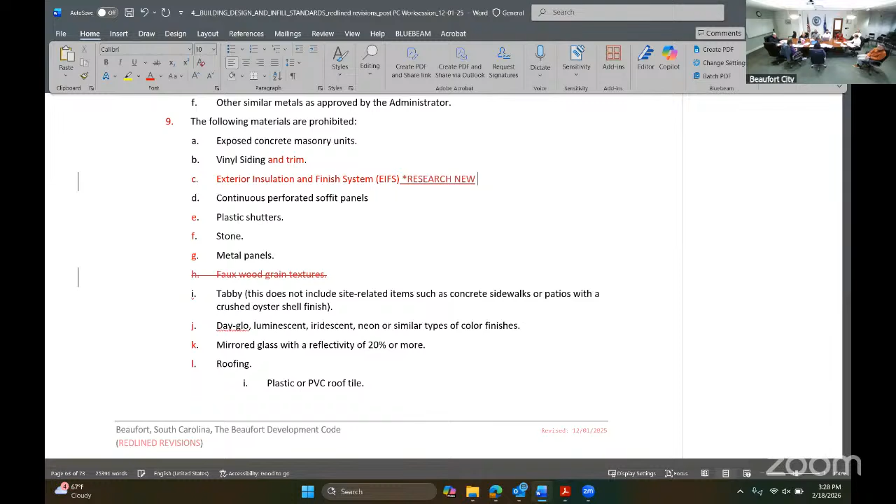Right, you probably had EIFS, the new stuff on it. And just above that—okay, vinyl siding's prohibited. Do we definitely want to prohibit vinyl trim? Absolutely, I would say so.

If you don't like the look of vinyl siding, why would you like the look of vinyl trim? We like the look of vinyl windows, and you can trim the windows with vinyl trim—that's a whole different thing, you can't really see it. I think vinyl siding is a different animal than vinyl trim. Yeah, I agree, it's a much bigger area we're talking about with siding. I think we should not prohibit vinyl trim.

A majority, which way? Got two or three. Okay, let's remove the trim—get rid of that trim restriction. Okay.

Well, there's no reason—but the historic district's probably not gonna allow that anyway, that's my guess. No, that's already covered. And then we've got tabby again. I thought we wanted to allow tabby, so we don't want it on the list of prohibited materials.

What you define tabby as being, that's the problem. Okay, well, we can remove it if you want. I think we should remove it. I don't feel strongly—there are tabby foundations everywhere, it seems, here. So we should remove it elsewhere too. It's one thing to remove it from the foundation, but do you want it for tabby walls too? I don't know.

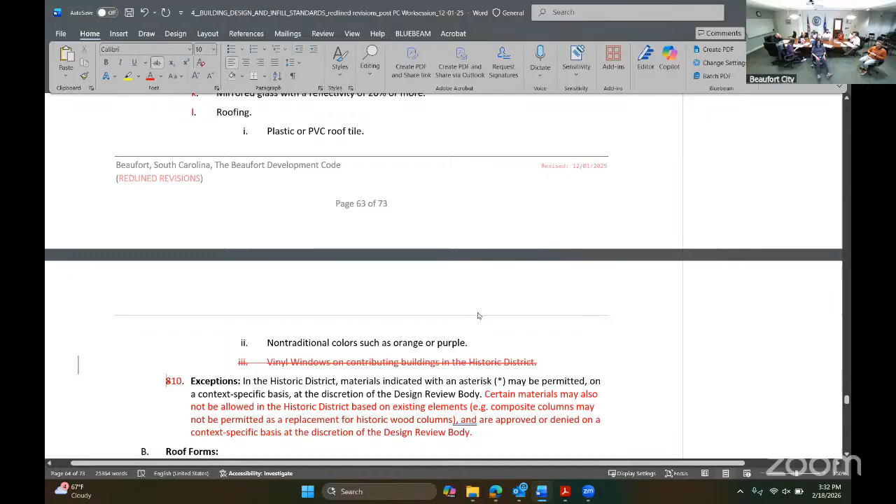I think, regarding the colors, non-traditional colors such as orange or purple - in my neighborhood on King Street there was a big renovation done, and the metal roof that was put on and somehow approved is fire engine red. They took down a bunch of trees, so there's nothing covering that roof. It's been up for a couple years now, two or three years, and it has not faded in the slightest, and it really sticks out.

So I don't see that that's any better than orange or purple, honestly. It doesn't seem to be those muted colors that we talk about. I believe the color of the sample was heritage red or something like that, but it didn't turn out to look that way once it was on this roof. I mean, we could add red if we want - I think they like bright colors. There's sometimes going to be that red.

Color for roofs in Charleston - it's one of the most common colors, but it's more of a muted color red as opposed to what this turned out to be. Well, maybe this covers it - non-traditional colors, or maybe there's some colors such as red or a bright shade of red, yes. Bright, maybe we say bright.

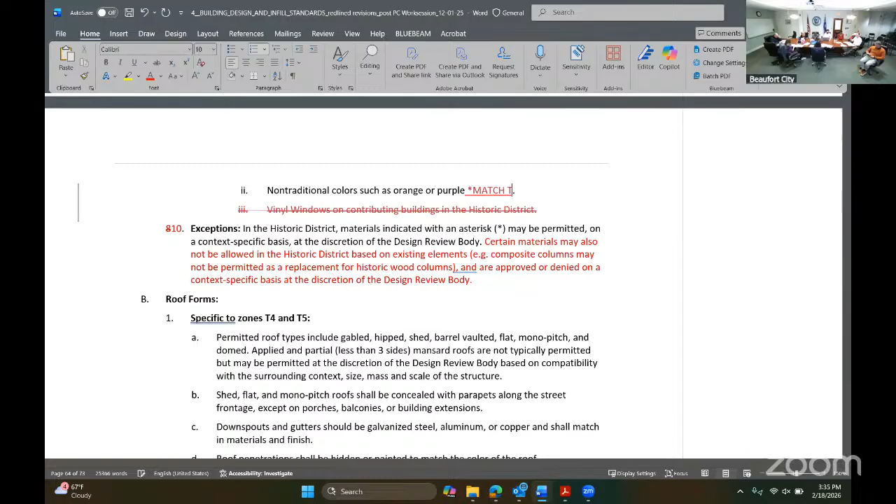Or is he just not... No, still heavily. I'll update them later. Well, I think we just need to get through the next few pages here, because those are the four, and then it kind of stops. So,

Exceptions, and then we can talk about next steps. So the windows are really changing. So nobody has any comments on the roof forms? We want to keep them to T4 and T5 only.

Downspouts. This is already in the code. Right, but the issue is I think currently this just applies in T4 and T5, so now is this applied everywhere? No, we're still keeping it specific to zone - we're not changing the section. I mean, that's true, the whole section, but this is still specific.

Gotcha, okay. So I noticed a lot of downspouts all over the place - the downspout itself might be metal, but then they've got something that looks like a dryer vent hose attached to it to direct water out further. It doesn't match the downspout, and it's not the same material in a lot of cases. I realize why people want to do that, but I don't think that matches this requirement.

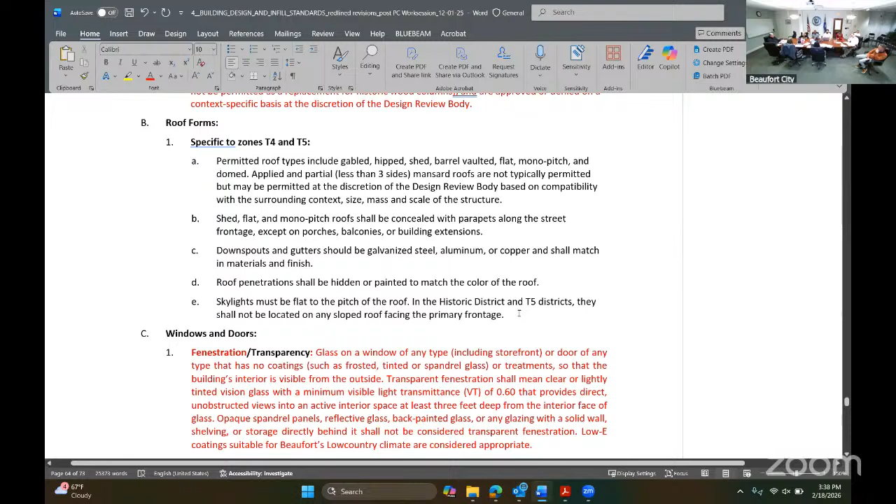Well, are we ready to go to windows? Because these are some big changes. This is pretty much, if we can get through this, to page 68. We're on page 64. Where did these changes come from? Are these all from Jeremy? Yeah, they're from Jeremy's suggestions.

I mean, was there an issue, a problem that's being addressed? Yes, there has been. The problem is it's fenestration, not transparency, so we want to make that clear. All of these types, this is a problem since I've been here. People are just putting up, Aldi is a good example, or Harbor Freight tries to do it too, this is a real problem. Actually, the back of the Harbor Freight is over there, it looks like a void, like a black light void into nothingness, because it's a window with nothing behind it, so there's no transparency. We're not clear on that, so that's what we're doing. It doesn't look good.

But there's some practical issues with that too. If you have a transparent window that looks in on the back of where you're doing fried chicken prep, that's a problem. And number two, I think there's a security issue, because if it's truly just nothing but glass, that's an invitation for somebody to come in there late at night, knock out the glass and go in and pillage your business. And rob the chicken.

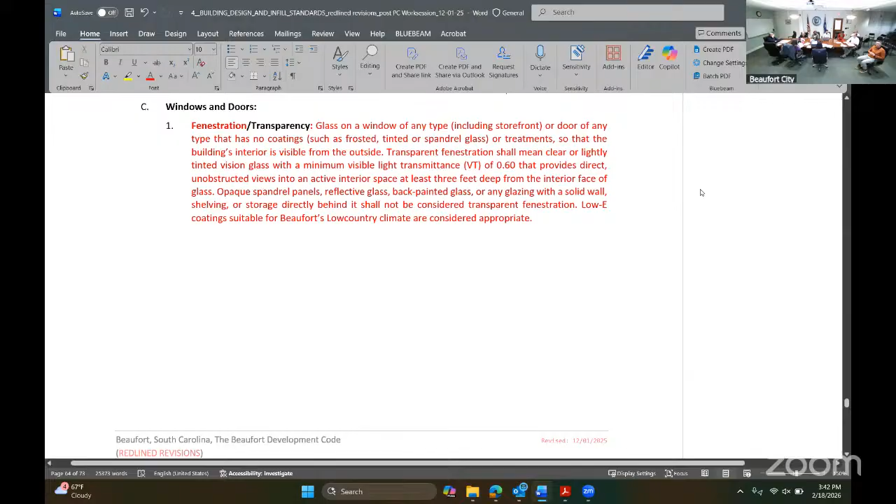Going back to what maybe we were saying, that if it was like on T3, I want almost an opaque glass for privacy, say just to get light in the bathroom but not be able to see in. I think this was specific to T4 and T5, but I think it should be RMX two, right? Yeah, I just was saying the residential districts. I guess the exception, could we add an exception to T3, maybe, like suburban district T3 and T3M? Add it just specific to T4, T5 and RMX, I don't know, or except for T3.

Well, I think that's why it was meant to be all, because we got a lot of property that's zoned institutional, IC, like Christopher was stating, the hospital is zoned IC for whatever reason. So I don't know why we'd load up Mossy Oaks with all these standards that aren't really needed, I don't think, in the single family districts, T3S and T4, it's T4s.

Okay, that's fine. Is everybody okay with that, or do you want some kind of exemption in these cases?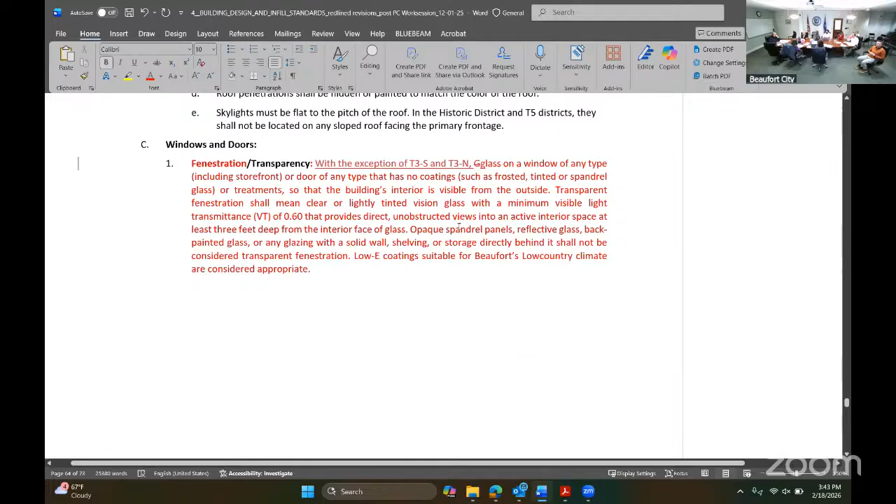We've approved things where there's a clear window, but then there's like a wall or curtain behind it. We'll get into that later with some convenience stores. That's always an issue - according to this, they can't have shelving or storage inside their clear glass.

There wasn't any addition to that. There shall be a visual clearance behind the glass of a minimum of 6 feet. Three-dimensional display windows at least 6 feet deep are permitted and may be counted towards it, so we're putting a limit on that. Faux windows are prohibited, so shelving or storage behind it shall not be considered transparent fenestration.

Do you want to carve out something in cases where functional use of the building, at the discretion of the planning commission... I think you're gonna almost have to have something about functional use of the building. As a designer doing commercial buildings, spandrel glass is something you do to maintain the architectural integrity of what you're trying to accomplish. So do we want to do something like, in the case that the functional use of the building will not allow for transparency?

The design review - the planning commission may consider lit spandrel glass or another alternative. But I think it should be lit, because if it's not lit, it looks bad.

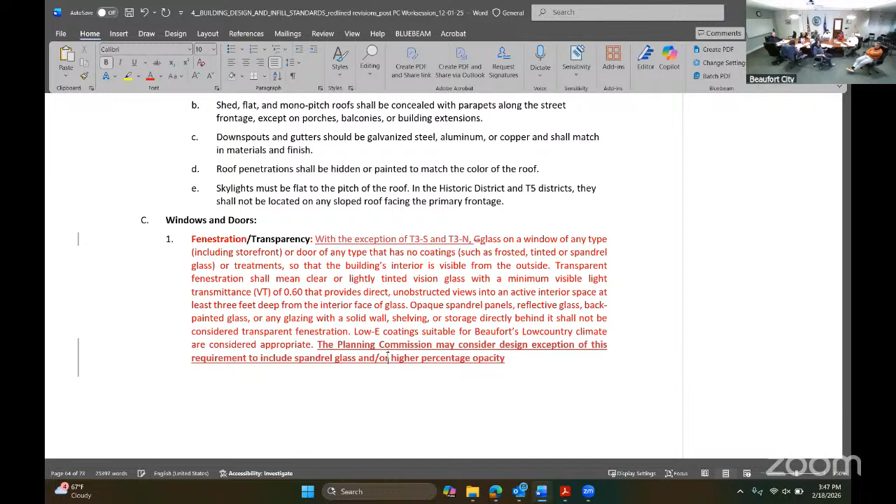And privacy in a private residence should be included. In cases where - we've already done this - the applicant proves these are critical functional areas, we'll have to read through that to make sure it's the same as what's there.

So the exemptions, from T2, T3 and single family or something like that - because you've got your single family and 2 and 3 family permitted in T4. So with the exception of single family, T3 and TP, any residential - well, we don't want a problem with that in these apartment complexes.

Well, and what about institutional uses then? We don't want the apartment complexes to not have big windows - schools and such, you know. How about commercial - how about we just put, with the exception of residential, because commercial would include multi-family. How's that limited to retail?

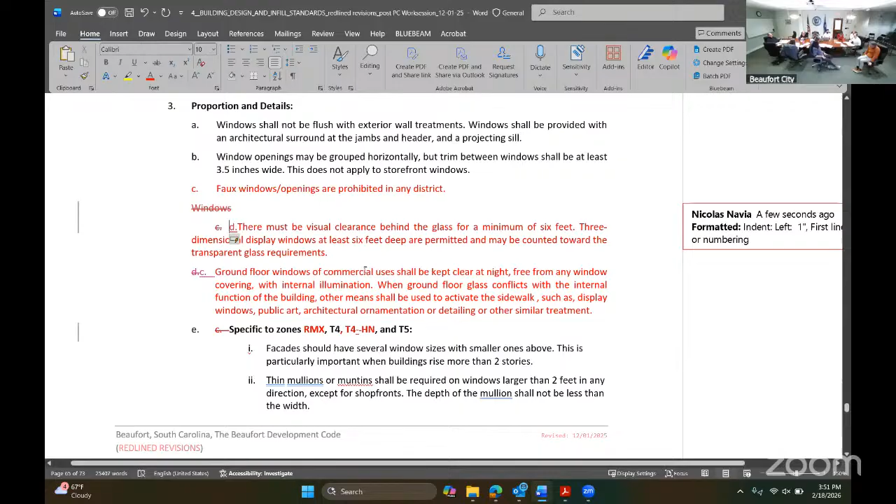Guess the idea is for it to be like an actual room. Right, it's the goal, unless you can prove that there's a functional or critical need, like a hallway. We had that, yeah, we had that, but Mike, we're gonna wordsmith it. I think that'll solve a lot of our problems, especially with the Aldi, you know, that doesn't look so on code requirements, they know.

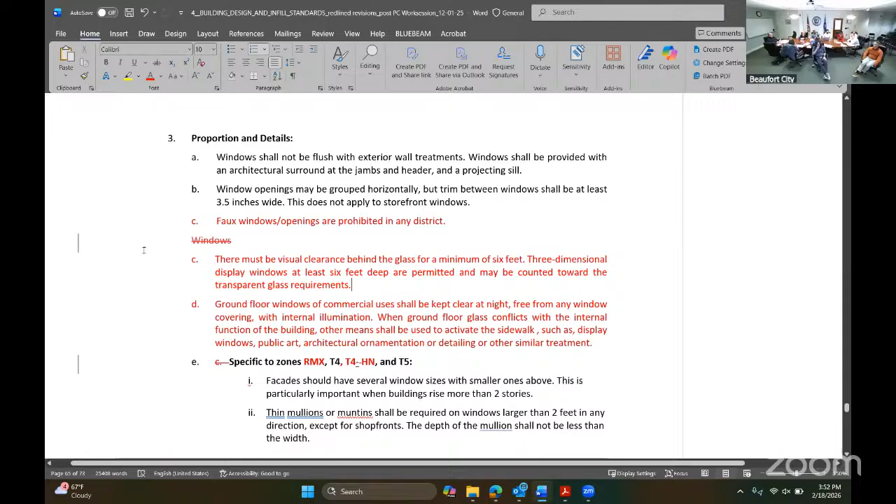Okay. I think we're just really onto the final page, 67, is really... and the code, we've pretty much gone through it all after 67. Okay, so then we have Tabby. Yeah. Page 67. Put that back in.

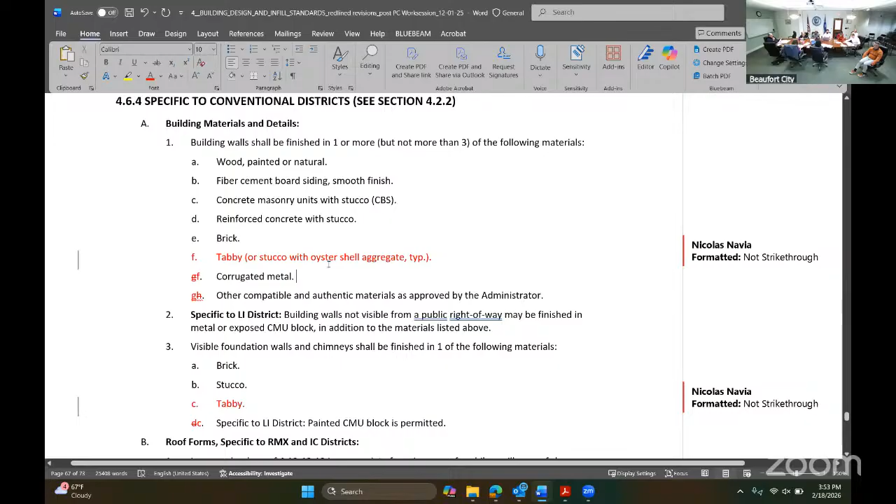On 67, 3B, it just says stucco, talking about stucco already and all that stuff. Stucco needs to have some definition, whether it's like stucco on block or something like that. You need a solid substrate. It's 67, 3. And just, like, you can't do stuff like wood framing, brick shingles or... yeah, but you have a solid substrate, and we're talking about EIFS already.

Types of EIFS, I think, research what research we have that we need to do on that. I'm not up to date on it. Done a lot of lawsuits with EIFS, but I think we need to take a look at the whole issue of EIFS and stucco and appropriately use terminology on it. Well, I think one way that maybe somehow we could incorporate... that's how it usually was, to say that it should have like a drainage plan. I just think we need research on it, see what the current technology is. I just got away from it too long to know what the current technology is. I don't disagree with what you're saying, but I think if we can come up with what the current technology is, state that line, because just stucco doesn't mean anything. I'm sure there's more behind stucco. Flesh out the definition, truly modern stuff.

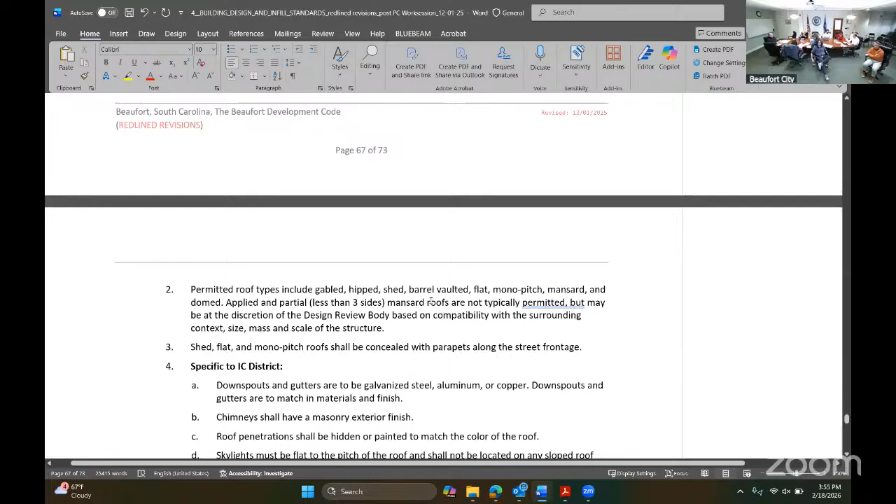Okay, final thing really is the transparency with the RMX and IC district. So is the first sentence in that section, that new section, really a sentence? But we might not need to use it, or for the page, 67. Looks like either new or revised C1, windows and doors. Okay. I mean, we might not need to do this because we're doing it for everything, because that's used to be, but let's think about that, because it's basically just the same requirement we talked about each time.

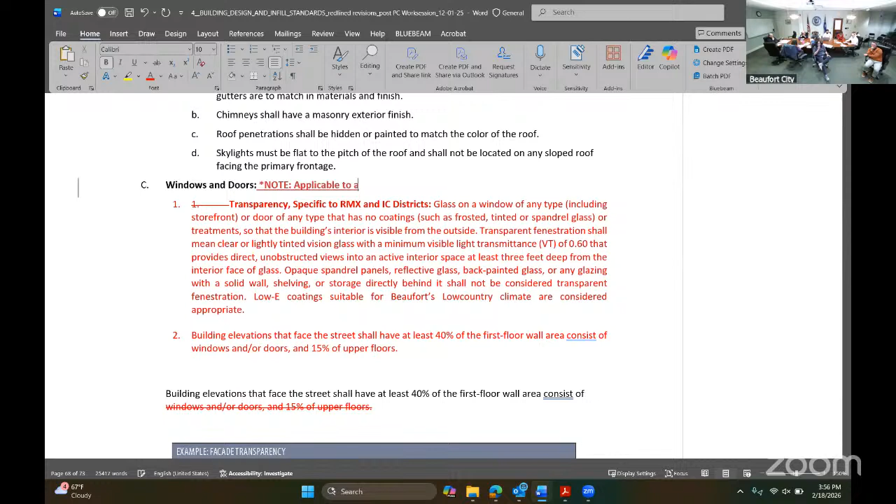General problems. Just put a note, like... it's gonna be hard to figure that out until we just create a clean copy to make sure that it actually makes sense. Yeah, let's.

So the 40% fenestration requirement, I guess, is to prevent having just a solid monolithic wall facing a street, right? But it seems like we need to figure out some kind of way to balance that requirement against a functioning business.

Which in the past, the balancing has been by allowing these fake windows. Fake windows, yeah, and I can understand why fake windows don't look good, but I can understand aesthetically why you'd want that, but practically, how do you run a business where somebody can look straight into where you're washing dishes, your dishwashing sink, or where you're breading chicken? Yeah, that's why we're adding that exemption, that he stated, the critical. If we can prove that, then maybe you guys have the discretion to do that. Right now you don't have that, so...

But the buildings are gonna face the street, the door is gonna be on the street, so it seems like all your public-facing functions are gonna be in front of the building there. Yeah, but I suppose, well, think about that Parker's that's in the new shopping center. So I guess what I'm saying is that...

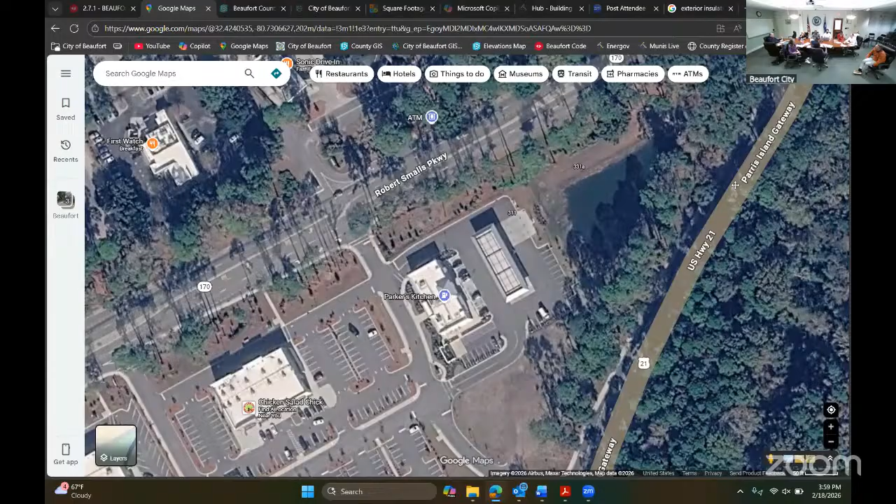I think around Parker had... Oh, you're talking about the one around on St. Helena. I'm sorry, I'm saying - that's a good one. Yeah, that backside could basically be a front. It's got transparency and it also has the glass facing, so it's kind of like a two-sided partition. Is that what you're talking about?

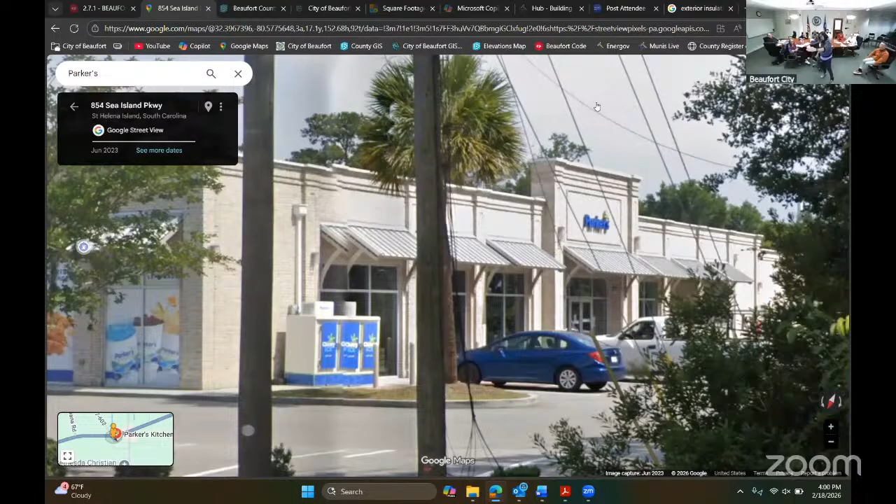Yeah, but you see, no, go to this side. I don't think this you can see - is that not oriented correctly? But if this was that particular situation, that would be the front on the street, it looks like the front. Which looks like the front, but it's hidden in the back, so it looks like they put it in the wrong direction. They should have put it on the... but you always want the front door to be facing.

That's - where is that? Is that real? Yeah, that's Helena Island. Yeah, so they could have made it work. I didn't know the back was that - the back is that much glass? Yeah, oh, never realized that either. Yeah, and I go in that way all the time. Is there a door in that back? Uh-huh, yeah, it looks that way.

We need to distinguish between primary and secondary streets. It's an idea to think about. So you got all that glass, but just empty. I think I have that already in the code. Which we wouldn't allow in the city, the glass to be fully covered. Right, so this one just needs to be rotated. So if that was in the city, again, would you be looking at where they're bred in, the chicken?

Okay, well, we don't have to solve this. Well, I mean, I think we've got a whole code, so you want to talk about the next. I know there's, you know, garages, I think some of the apartments are figuring something out, there's some wordsmithing on some of this that has to be done, but how do you want to do this moving forward? Was this successful?

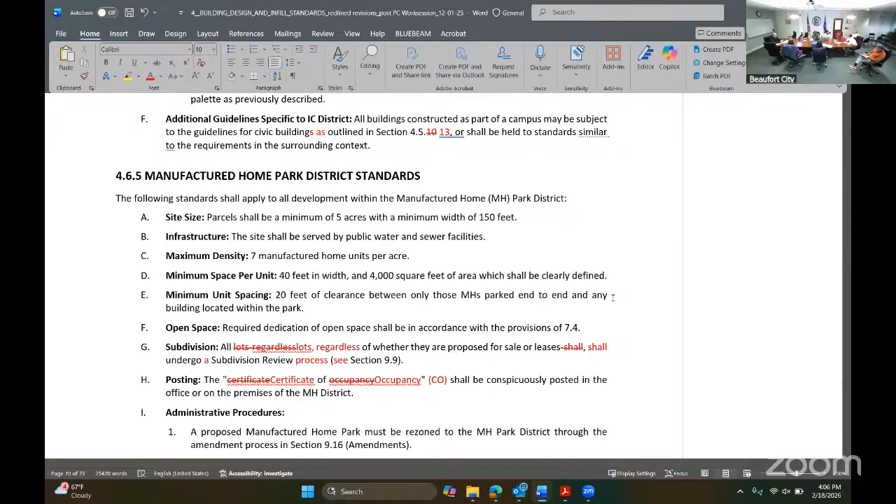Sitting up. Has the deadline passed for something to get onto the agenda? Some stuff in review has kind of a rolling deadline, but in the next week it'd have to be, and I haven't heard anybody say anything.

Yeah, no one's even close, but I'm 90% sure that we're not gonna have any items on the agenda. Okay, so we planned that. It's an executive decision.

We will do the 16th as a work session in the afternoon, if Sean's available. On March 2nd, are we thinking 1 o'clock? Yeah, that's how we can do this.

I got a medical appointment at 11:30. I should be able to be back by 1. Do you want to start at 2? Did I give you breathing room?

It'd be helpful if we could. Yeah, 2's fine with me, that's not a problem. I think the only issue with that is it's like scheduled regularly for one, I got it on the calendar.

Oh, well, Tuesday, for March 2nd? Oh, okay, well if I'm a little late, I'm a little late, I guess. You know, maybe we'll have a lot of public comment. Yeah, that's true, it'll be-medical appointments way out.